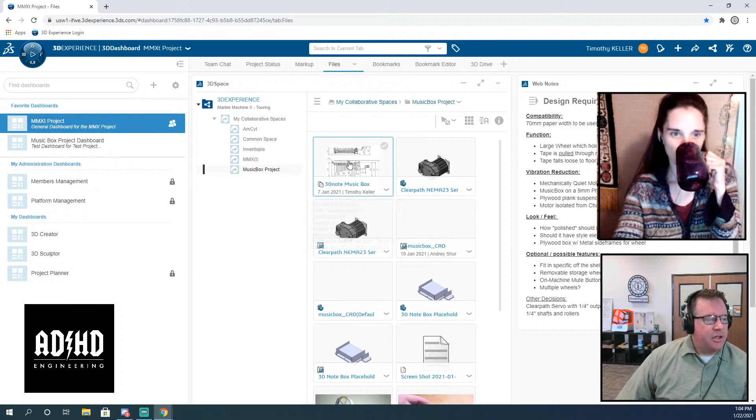So here in the platform, we have this 3D space, right? And I've uploaded a bunch of the drawings from the music box, right? And then we have this CAD — I uploaded a bunch of stuff, right? So the 3D experience thing, right, they allow you to upload a bunch of media, but there's also a 3D drive, right?

In the 3D experience, I don't know if either of those are actually the right place to do it. I think there's a better place, I just can't remember what it's called. So here, I downloaded some of the parts we're going to use for this music box from McMaster-Carr, right, so we have the drive pulleys, timing belts, that kind of stuff. I put them here because I can't upload a SolidWorks part into the 3D experience thing, right, but these don't show up really anywhere.

If I go to the music box project, I see these guys that I uploaded, but we're gonna go on at least this here. This is the dashboard that I made, and I don't know if I'm doing this right, but what I definitely do know is that I don't totally understand the hierarchy here. So those are those — what I understand is each one of those is a separate dashboard, right?

Here's the question: how do I find the files we worked on? So Music Box CAD, is this the one? No, that's the one that Andrey made, there are CAD files in the files. Here we go, this is loading more. So I'm just trying to grab the Music Box stream idea, and this doesn't show, it's a CAD family. Oh, that's another question — is with SolidWorks, there's like, you get parts. It's still loading for me.

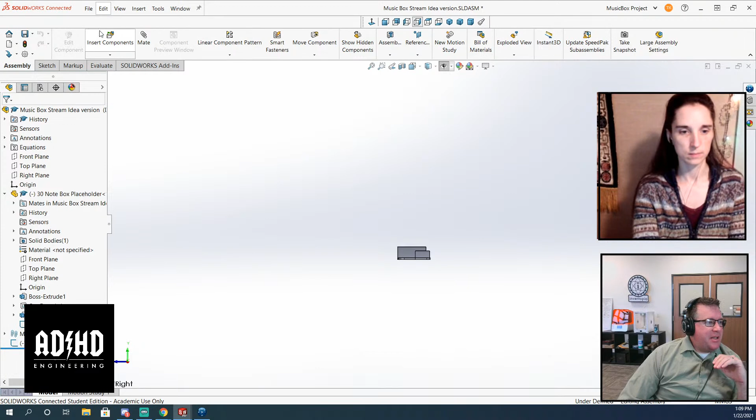Having a flat file structure is not going to work for that, so we do need to get a handle on this. But let's say I have this assembly. I have an assembly sketch here, which I can't see at the moment, but we have one part in here.

If I wanted to insert a component, I can insert the paper pulling mechanism because I have that open in its own window over here, and I've saved it, so it's in this little open documents box. So putting that in is no problem.

But I purposefully left bringing in the timing belt pulleys that go with this for today because I wanted to show this. So if I hit insert components and I hit browse, you saw that I had... I'm going to bring the dialog into this window.

I had uploaded these part files. They're SolidWorks parts that I downloaded from McMaster, and they are nowhere to be found.

And by the way, if you look at these things, so the things that I had done, I have a personal project, an Inventopia project, because I've been designing tables and stuff. That's kind of like my practice things. Those are all here.

So let's say if this is a project that we're all working on, all these things that I thought I kept separate in my Inventopia co-working tables project, which I wanted to keep separate from the Marble Machine project because this has nothing to do with it, are still showing up here in this file.

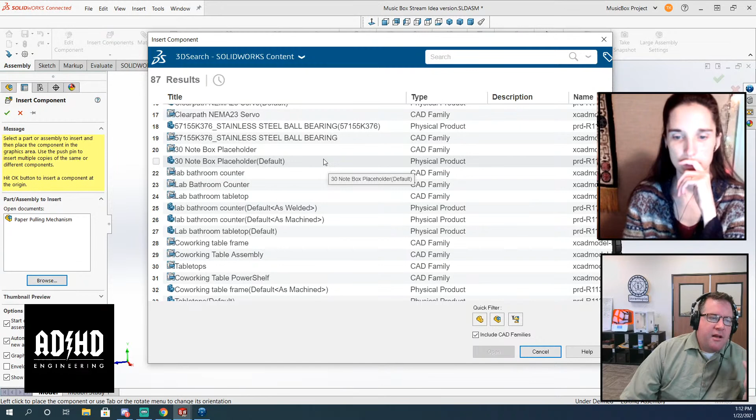If you look on the platform, this is one of the various things I'm building - these are tables I'm building for my incubator. That's fine, it's all in its own thing. But when I'm pulling it up and trying to figure out how we manage this, that's the next step and the biggest issue we need to drill into and understand, because this isn't going to work when we're dealing with 2,000 parts for the Marble Machine.

Do you want me to be taking notes on this, questions we need answered, or are you already doing that? Well, I don't think I can stream and take notes. No, I mean did you already start a document or something?

Well, no, we have the notepads in the platform that we've been dealing with. Oh that's right, okay, I'm going to open that up - I couldn't remember where it was. It was in the MMXT project, and then we have the web notes right here.

There's a comment on YouTube right now from Tom Quinn. It says, 'What's in the arrow where it says SolidWorks content? Maybe you can tell us to only look in certain projects there.' Let me look.

The arrow that says SolidWorks content here - above that. Sorry, there's a delay from where I'm seeing your mouse. Yeah, there's nothing there. But here, you could do advanced search. Either way, all of these things. Oh, that's interesting, how do I get out of that? Regular search - I'm going to close this.

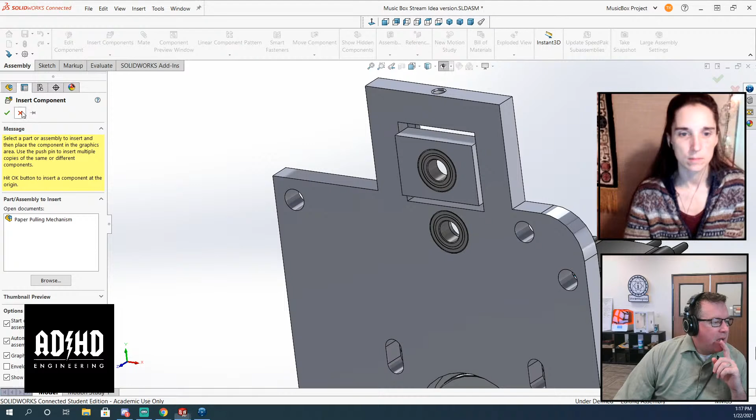540. Open this with SolidWorks connected. So now I have a bunch of SolidWorks here. Again, if you look at here, I'm going to close out of this. Insert components, the open file... that's not the one I want either. The ones that are open don't show up here. You have to open them and then save them. So let me open this guy.

If I save this, then it also shows up in the other place. It shows up in the 3D space. So when I do stuff here with the 3D drive and upload stuff here, until I open it with SolidWorks and save it, then it will show up in the 3D space. Anyway, it's just how it is.

So that's what happened. I downloaded these ball bearings from McMaster-Carr, and why I have 3 copies of them, I don't know. That's kind of annoying. Getting rid of the multiple copies would be an interesting thing to learn about. But anyway, let's move on to actually designing parts.

Well, hold on, because I'm still trying to get used to the 3D experience. I'm over in the Music Box dashboard. I'm not seeing the notes in there, and I just want to make sure I'm seeing the same dashboards that you're seeing, to make sure everything was shared with me.

Music Box dashboard project. If I can go to... I don't see any of those top files and media. Picture, notes and chat—I don't see any of that. Okay, oh boy, all right. Well, I'm just going to make notes locally and we can upload them later. Okay.

Yeah, there should be a way of sharing this thing, right? I should be able to... Oh yeah, I'm not seeing Music Box project dashboard. I think if you go up at the top, see the blue line, it says Music Box project dashboard with a little dropdown chevron. I know there's a lag, so it's up at the top. Yeah, you would think I would be able to share. It's the... there's the share there.

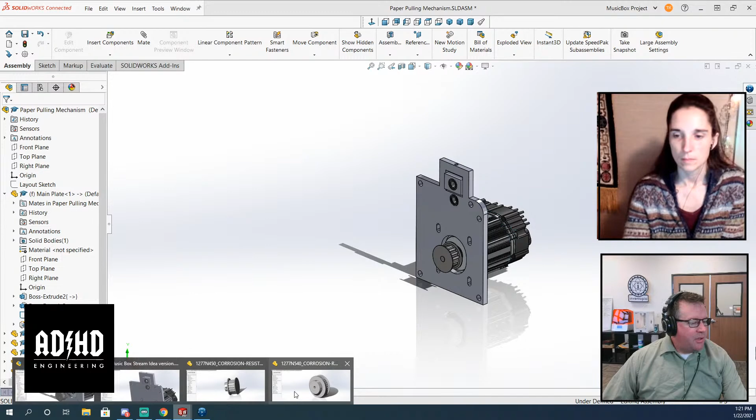Now I need to find the big guy. I'm going to save him, and save it in the platform. And of course, all of these files—if you look in the lower left-hand corner...

Because another user of this CAD workstation at Inventopia installed SolidWorks Student Edition, I am now infected—I am infecting everything in this project with the academic watermark. That was my original problem, if you remember, when I first installed this. Just wipe your hard drive now, man. Yeah, we might have to just live with it. And actually, if we're willing to just live with it, that might be liberating, because it would mean we could bring people onto the CAD team who do have a student license. It's not like... that watermark is there to shame people who are using a student license for commercial purposes, but we do legitimately have a license that we legitimately got from SolidWorks. So we're not scalping it, right? So morally, I feel okay if stuff is watermarked like that. None of us are paid for doing this, either. So anyway.

Wait, you're not being paid? I'm being paid. Oh, you are? Okay, can I be a subcontractor? I mean, you haven't sent my check yet, but I didn't know that's how this was working. There have been misunderstandings. We should have clarified that at the beginning. What part of slave labor did you not understand?

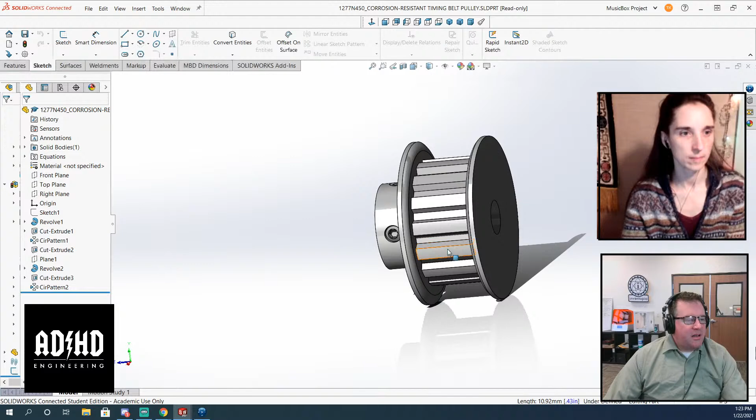Oh, this isn't constrained at all. Beautiful. Oh, because I just did that in this assembly. I thought I was doing that in the paper pulling mechanism, which I'm going to close now. Discard and close. I'm also going to close. Well, we'll see. Just so that I don't make that mistake again. Yeah, there we go.

All right, so let me change gears. You guys ready to change gears a little bit with me? Yep. Yeah, all right. So last week we did all this.

And what I think I want to do is... oh, there's a ton of blue lines. Well, yeah, I mean, we were sketching, right? I'm going to break this thing all apart.

I think what I want to do is, so this part up here, this is the soundboard that's actually doing the resonating, and it needs to be vibrationally isolated from the motor.

So what I think I want to do is let me get this assembly. I'm going to open this subassembly first. I'm going to get this lined up, and I'm going to show you how I want to. I'm going to actually reopen it. I'm going to show you how I want to do the vibration isolation.

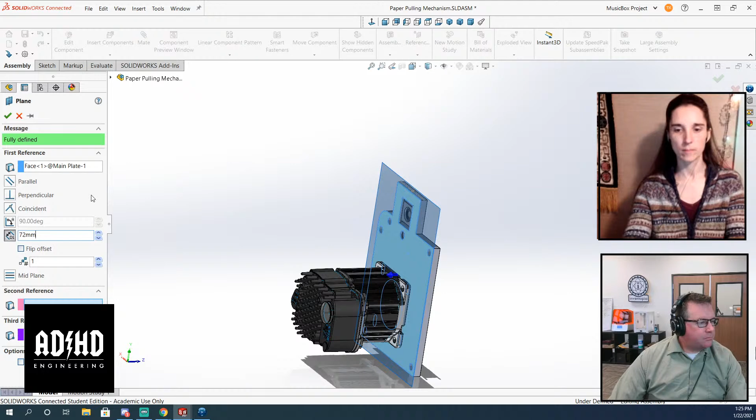But first, in this guy, I'm going to add a reference plane because the paper is 70 millimeters wide, and I want this to be 72 millimeters. I'm going to make a plane there, and then I'm going to add another plane in between those two. So that plane is the center line, or the mid plane.

How come I can't rename it? Am I just not patient enough? There you go. All right, save that guy. And then... oh, wait for it to send to the server. And close it. Yes, rebuild.

So now this guy, I have this mid plane, and I'm going to mate it with the... like that. And because this music box we lined up right on day one with the middle of the assembly, so now we're actually lined up that way. Okay, that's good. And we're also going to do, this is where the paper comes in, that plane right there, and we're going to have that be coincident with that. All right.

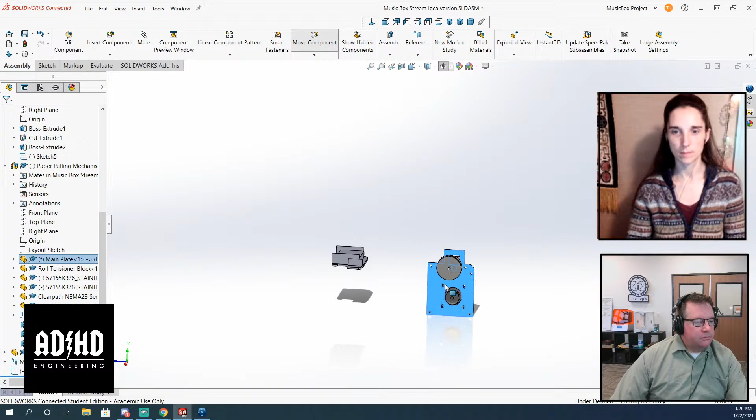So the papers, ooh, that's interesting. This is not fully constrained. Now it is. All right, so now we just have to play with that distance. So how do I get my...

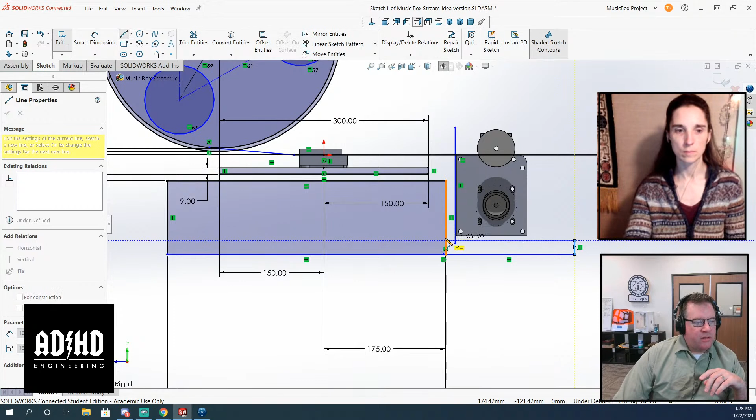David, you mentioned something about being able to view the drive in SolidWorks, so I wouldn't have to open files through the web browser. I'm sorry, browse the part library through SolidWorks and not the web app. Do you think that would be possible? I'm a little bit confused what you're asking. We have a set of files in the 3D space, I get it, for this project. Right, so not in 3D Drive, which we haven't solved yet. You're talking about within 3D space, the collaborative space. Yeah, so if you allowed SolidWorks to populate the collaborative space, like that's listed at the top right corner, all you have to do is use the open command, and it'll automatically go into your collaborative spaces to open parts. Great, yeah, and actually, if you're patient enough to wait for that collaborative space to load, your home screen also shows recent documents populated too. Awesome. Who would have thought that David is the patient one? That's like the series finale, shocker for me. Wait a minute, David's the patient one? It's all a lie, it's a facade. Fake news.

All right, so the idea I have for this paper pulling mechanism here is that because we want to do vibration isolation, and I have dealt with... let's go to McMaster.

McMaster vibration mounts, sandwich mounts. I've done these actually on some of my heavier drone frames. They ended up not being totally necessary.

But also there was a laser processing machine I designed a few years ago, where if you bumped the machine, the galvanometer that was steering the laser doing the decoration would go out of whack. So I did vibration isolation using basically these things.

So how effective are they? They were very effective. I don't know if they're going to be effective enough for this purpose, because we're only really going to know if you mount a motor and then test it.

But the idea here is that we use some of these mounts, located right here in between these two parts, top and back, and then one or two here, so that this module is floating with respect to this main body.

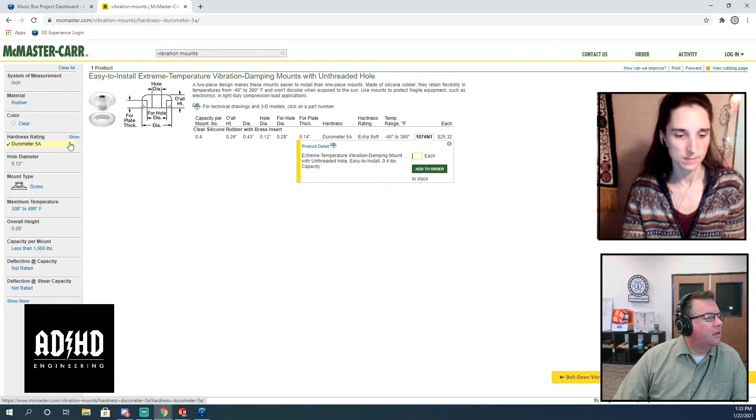Hey, does anybody remember if the durometer rating - lower is softer or lower is harder? I think lower is softer. Yeah, it is - I remember TPU 85A being softer than 95A. So here, thinking we want maximum vibration resistance, it would make sense that the softer the material, the more vibration isolation.

So here, down on the McMaster site. By the way, I don't know why no one else in e-commerce has figured out how to do a website as good as McMaster Carr has. It's been like this for 10 years, and nobody else has ever come close.

I found this years ago - I used to live down the street from McMaster Carr, which is crazy, and I found one of their places. I found their website and it blew my mind. I was like, everyone needs to organize everything this way. It's so easy to find anything on the whole website. This is my vision for the Discord, which is impossible, but I love it so much. I've loved it for years.

So let's have a discussion. Sorry, go ahead Eric. You guys remember? You guys know James Passmore?

He got a job working with McMaster Carr recently. Oh nice, that's cool. Good for him.

So here's the question. The parts that I've chosen - let's see how quickly we can piss off David Lewis. So this motor, this is a ClearPath servo motor.

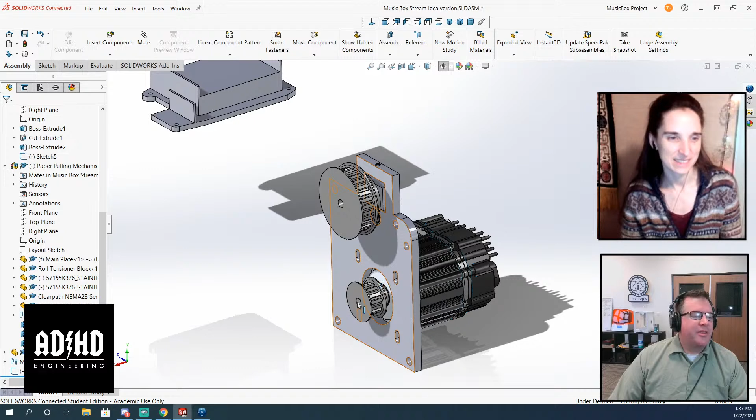So that means we now have timing pulleys that need to fit with those shafts, and those are going to be imperial. And then we're going to have a shaft in here - this is going to be a 1/4 inch shaft that goes through. So unless we want to make our own shaft, which we don't, the rollers that go on this are also going to be imperial.

So you have this stack up, and it's because the starting materials you have are imperial. David and I have complained together, not in such a public setting, but have complained quite a bit about how I really want to design metric. I want to live in a metric world, but it's really hard - you pay a price for trying to be committed to that.

Yeah, and Kooky is talking about working on a 90s car. By the way, the Ford F-150, the bed length is metric. If you look at it, it's like 5 point something - yeah, it's exactly a 2 meter long bed.

So there is hope. But one of the things that I don't like about this project already, but I'm willing to live with, is the fact that we're going to be building this thing using imperial parts. David, can you forgive me for that?

I can. I also could tell you though, and I've done this in the past myself, the bore of a sheave or a pulley is not set in stone. And actually you can buy sheaves or pulleys with a machinable bore.

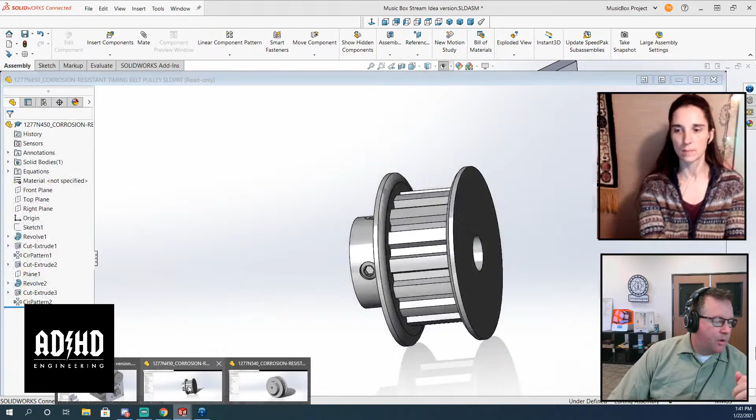The other thing is I'd love to use 8mm shafts, because then we can use skateboard bearings for all those bearings rather than these. The bearings I have in it are 1/4-inch ID bearings, and they're like $8 a piece. Anyway, I don't like paying a whole lot for bearings.

So that'll be my homework, trying to go metric with these drive pulleys. We'll start with an imperial motor, but then try to adapt from there. Yeah, love it, okay. You feel like your metric sensibilities are being catered to, David? I do, I feel refreshed and valued as a contributing member. Good, you are valuable.

All right, so I do have a comment. But I do have a caveat about those rubber standoffs. I have used those exact ones, I could even give you the part number from McMaster-Carr. If you're mounting something heavy vertically, the bushings are holding, so they're fine. But if you mount them on the side and put a load like a belt pulling against them, I don't know if those are the right ones. Yeah, that's a good point. Because they're two pieces of metal with rubber in between, so they're meant to vibrate this way, but not to be loaded in shear.

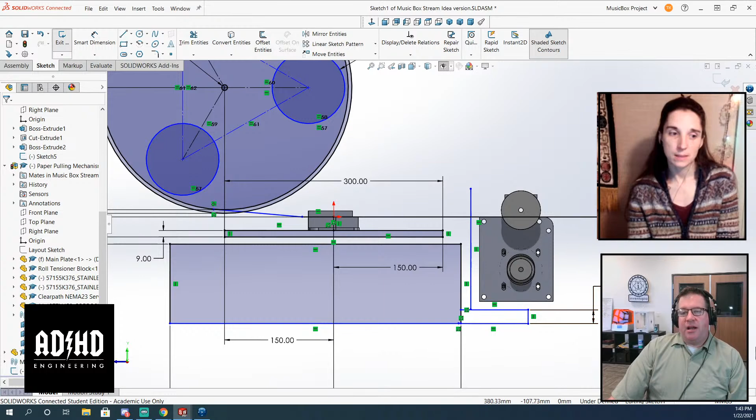Well, so that's the question, right? If we hand this over to Martin, are we going to make it in the U.S. and give it to him as a gift, or are we going to surprise him with a set of blueprints and tell him, 'Hey Martin, build this'? Yeah, he's not going to do that, he's got a million other things going on. I think if we're actually going to make this for real, we're going to have to do it ourselves, and for phase 2, farm it out to whoever we can find, kind of like how Martin does. I'm not envisioning Martin building multiple copies of the touring version himself. Maybe if these aren't going to be shipped across the ocean, there'll be two, one on the European continent, one in North America, so someone else will have to be building it.

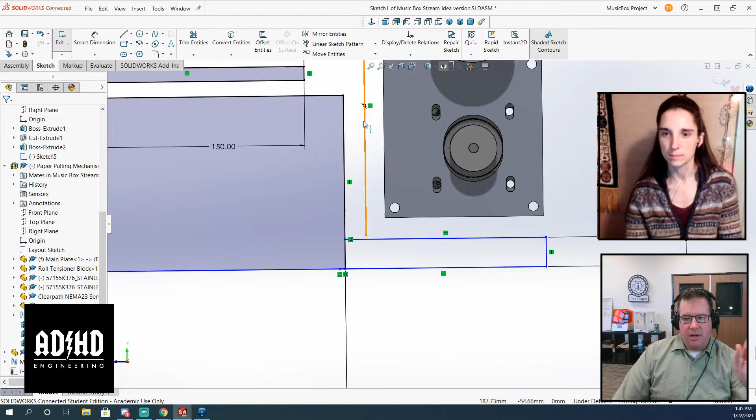Well, we're not going to solve that issue today. But getting back to the idea of shear, we have basically 4 of those mounts, so by gravity they're in compression onto a tongue sticking out the bottom edge. And then we have a couple here just to stabilize it in the pitch axis, from our perspective.

So let me just draw it. I kind of feel like this thing isn't fixed, and I want to project a geometry off of that, but I can't because it's not fixed. So do I just pick a location for that and call it good? I think I probably should.

Well, how should I constrain this? That's a very good question. I'm kind of thinking I just pick these 2 planes, and say that's a distance of 25.4 millimeters, and call it good. Well, this is where I would have built a skeleton first, and aren't we supposed to constrain it to that? Well, yes, but building the skeleton is something you can do once you've already figured out the design and made some design decisions.

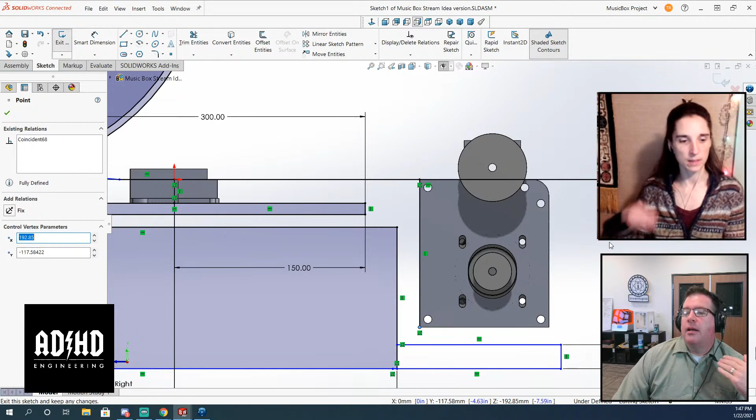So I have this sketch here, I intend for this sketch we were just working on to be the skeleton. But what we're doing right now is really back of the napkin, just doodling. And you know what we said in the stream last week was I'm willing to walk away from everything we do here. This is meant to be an experiment for the sake of learning the platform for phase 2, a learning exercise.

So now I'm gonna grab how thick these things are, the metric heights. Look at this, metric chemical resistant vibration damping mount, blah blah blah. The height is given in inches. But the threads are M6, and it's still 1 inch tall. Well, there is such a thing as a metric inch. I'm gonna metric barf on you for saying that.

Yeah, you can actually type that and it works fine. There's no reason not to include inch specifications if you have to, because even if you're in MMGS, you can still input inch. Or furlongs or chains or whatever. Yeah, I definitely want to work in furlongs.

That's like, have you heard about the FFF system? No. It's the furlong, Firkin, Fortnight system. So length unit is furlong, volume unit is Firkin, something apparently, and a fortnight is the time unit, obviously. I love it, that sounds amazing.

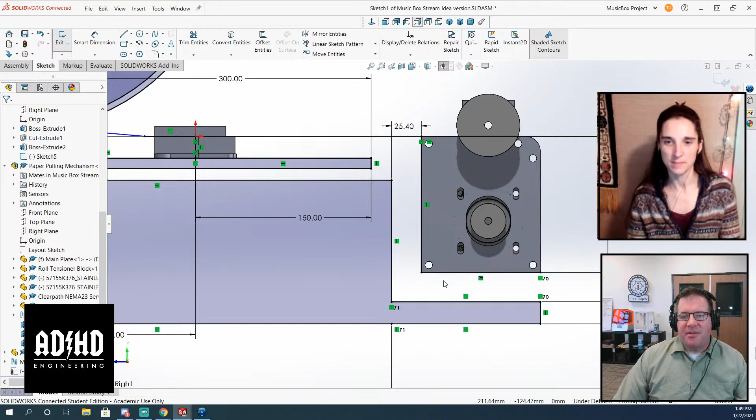Alright, so you can see the mounting concept here, which is that we have these big vibration pads. There'll be basically a shelf in this box, with vibration mounts. This will make it into basically a self-contained box, a powered module. We'll have the power come out of these connectors into here, and that'll be a flexible connection.

And there are 4 mounting points here, and 1 or 2 here just to keep it from rolling off. And then we'd have the same gap here. This is going to be 1 inch too, so we'll use the same part, I don't want to make a new global variable. So all of our vibration isolation will be done with the same part number. Yeah, good, awesome.

And we're looking at the back of the music box right now, right? We're looking at the side. So which side faces the audience? Probably like this side. Yeah, well, because in the other one...

Sorry, let in the other one. Go ahead. He has the spinny wheel thing in the backside, away from the audience. Is that so?

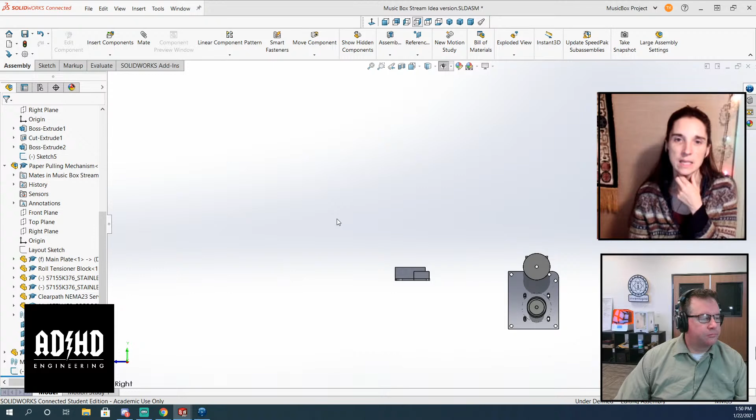I think so, I'll bring it up to look. I think it was on the left side, but meh. This is weird, how come you want to hide the motors behind so they don't show to the audience? I think the motors are ugly. That's what I'm trying to say. That's not very nice to the motors.

Well, here's a weird thing, design history wise - my logo is in the way here. Tim, your timeline is cringe. Here's the question, and this is the cringe thing: this is my layout sketch, and it's downstream of the part I just made. So I want to make a part based on this sketch, and when I open this, I'm already editing that part.

So this is why I generally don't design in assemblies. It's kind of, you're tripping over yourself, really. I made this argument in Fusion and was kind of outvoted. I get it, whatever, but the truth is that's kind of how you have to roll if you want to design in assemblies. It's just not made for it.

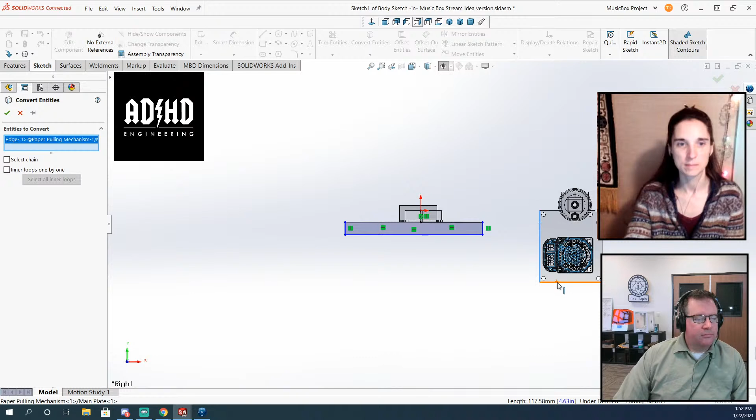Yeah, no, that's not how history works. But I did something wrong because I used to be able to make a layout sketch in an assembly. You can, absolutely - you have to activate the assembly. You're in a part right now. Right, okay, so what did I do?

So if I have this sketch, here's the assembly. Because how is this sketch not in the assembly? It is in the assembly. Yeah, but it comes after all your mates.

It's hard to describe exactly why it's like that, but there used to be - this was back when I was playing with SolidWorks 2011 - there was a layout thing in the assembly. That used to be a feature. I don't know if that went away, but yeah, that's what I was trying to do here.

This is apropos for our intended path with the MMX, which is that we want to make a family of skeleton sketches - our master sketches. So, David, if we were to start this over again, how do you do it so you have a skeleton sketch? Well, before you insert a part or create a new part, you would just start a sketch. It would stay at the top because there's no dependencies. Right now sketch 1 looks like it depends on other things because that's the master sketch.

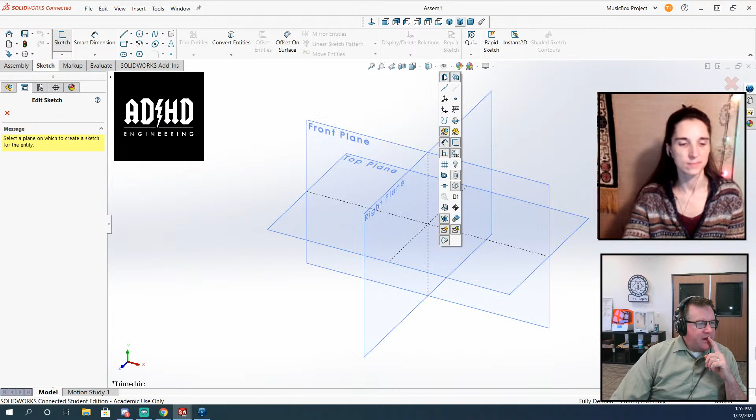If we were to make a sketch now - I don't know why my planes don't show up by default. Let's say we're doing this, and Tim, if you were to go in your feature tree and want to turn your planes on and off, right next to the A in ADHD in that black box, you'll see there's a little caret pointing right. There you go, now that allows you to turn those things on and off.

Pro tip - you can turn on and off sketches that way too. Like anything you're working on, you can turn on or off visualization from there, and also make things transparent, which is kind of cool. I like to work with surfaces transparent because then you can see through them.

Okay, so let's say this is our music box layout, where we have our soundboard, and now we have our box - this is kind of the way we drew it. And here is our paper pulling mechanism. So that box at the top has an open side somehow - it's not showing gray, not sure why. You must not have - it's because this one needs to be, or I did something weird.

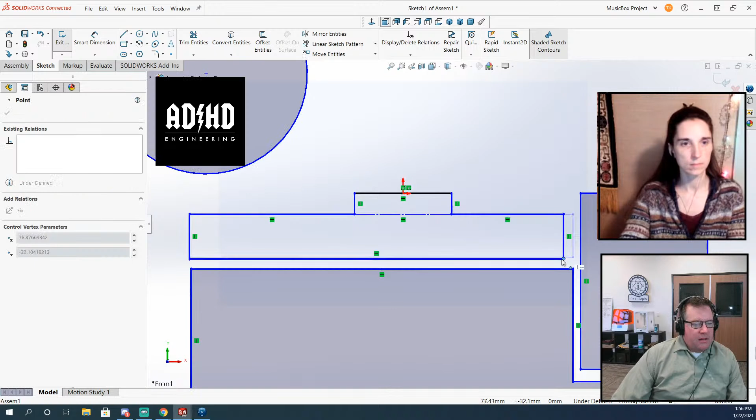Yeah, I'm not too worried about that because we're kind of doing this for, right? So I exit this sketch. Now this sketch is here, right?

Assembly, insert components. Let's put one of these timing belts into it. Okay, it's right there, let's see where that shows up. Oh no, my sketch is above that now. Okay, yeah, so that becomes your skeleton. That's the whole reason why you would have a skeleton - you put it in there first, so it is above it.

But here's my question, right? So in this one, this guy, I made this sketch after we placed this box. You guys watch, we developed this sketch last week, right? These three, you must have had dependencies. I was asleep. Okay, I forgive you for that, Eric.

By the way, the forgiveness is flowing on this side of the Atlantic. But anyway, so yeah, I mean, this thing was...

I don't think I understand that, but we inserted this thing and then we made this sketch. So I don't know, do me a favor, right click that sketch, and then choose parent child. Well, so that's another issue, look at this, this is on the bug list. How do you...?

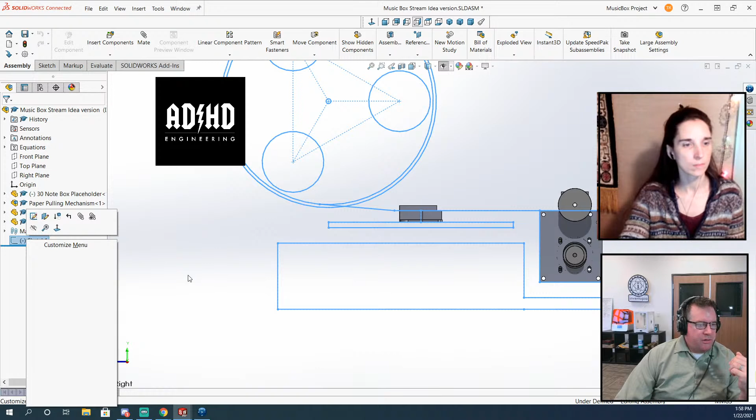I just did that exact same thing with the exact same thing in front of me, and I have it. Let me - is your sketch open still? No. So I have a feeling that happens because if I move SolidWorks to my other display, so I have a 1080p display on the left, which I'm streaming from, and then I have a much higher resolution primary display on the right, and I can see the things in that thing when I have it in my primary display. But if I have it over here, I have an older 1080p monitor here because it's the same resolution as I'm streaming from. So I think that's it, it's a monitor resolution issue. And I think SolidWorks thinks that - maybe I should change the designation, right? Maybe I should have the computer think that this is monitor 1, and the other one is monitor 2, and maybe then SolidWorks would get better. But yeah, I can't do that.

So okay, so you said let me do that offline then. So can you do it? Child? You can do it another way. Okay, if you go to the menu view and then user interface, you can actually enable - you might have seen on some presentations the parent-child visualization lines.

There you go, below it, there you go. One of those two, you can actually - it'll put arrows right in there. Yeah, I'm not getting anything. Well, because you haven't selected anything. You have to, if you grab that little tab and then move it - there you go, so that's what its dependencies are. So that sketch is dependent upon those two things above it. I see, so that's why it would really never let me do anything above that. It wouldn't let me. Got it.

Okay, so pro tip - wow, parametric design. Yeah, well, it's also, I mean, there's - okay, that's a cool feature. So we're not so far away that we can't just try to do it better the next time, right?

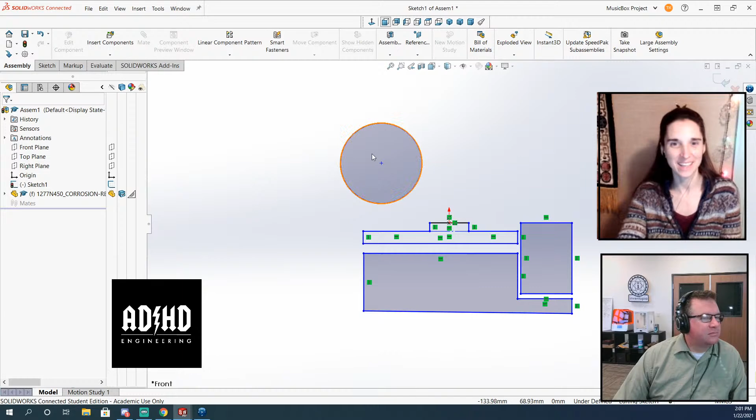Acoustic vibration isolation for the music industry. Did you take a look at the orientation of the music box on stage? Yeah, so the way that we're looking at it is from behind, the opposite way. The big wheel is on the left when you're... Okay, no, the big wheel's on the right if you're in the audience, because the way that the trapdoor falls open, I mean, the door storing all the components is that way.

That doesn't mean it has to be that way. It would be nice, I think, to have it look nice from either side, so that you can pick which side of the stage you want to put it on, because there's a bit of arrangement when you're doing a stage show of what looks nice. So that would be the most flexible solution. Just making sure that there's not some big ugly motor hanging out there would probably be my suggestion.

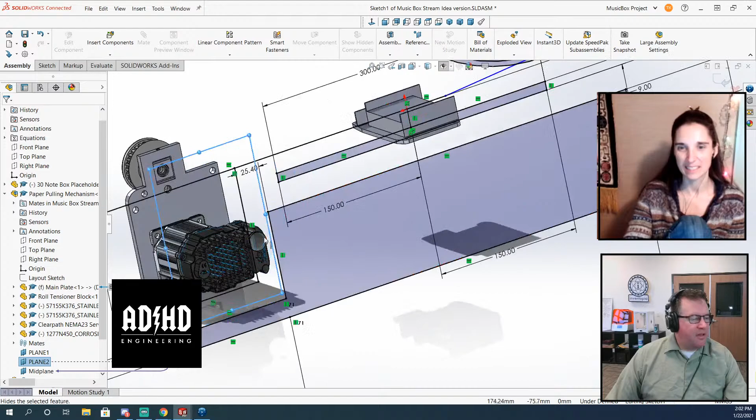Who are you calling a big ugly motor? I'm calling the thing that, yeah, we put on the music box. The idea here is, and I can't show you because I wasn't, it was that this is going to be entirely internal, that this motor will be in this mechanism down here. Just making sure. Yeah, and if you look at this thing, these, the secondary plane that I made, right? You really just have this. Maybe this does have to stick out - these are cooling fins.

Okay, so maybe it will be slightly visible, but there'll definitely be a plate over here because this is all going to be a box. This will get extruded from both sides. What if it was open on the bottom? Would that be enough cooling, or would it have to be aligned with the fins?

Well, I don't know how much, because we're not going to be really driving this motor hard. It's pulling paper, right? When I was looking at this, I thought 1/4 inch seems like a really thin shaft. How many Newton meters are those rated for? More than we need, awesome. I had to remind myself I should use 3/8 instead of 1/4 inch shaft because the motor is available in both 3/8 and 1/4 inch.

If you look at the 30-note music box, the built-in drive mechanism is just a 1.5 millimeter shaft with rubber rollers, so we just have to be stronger than that. We don't have to worry too much about being strong enough.

So is this motor overkill then? I mean, it's nice and it's really reliable, but can we simplify? It's never going to need to go fast, ever. Well, we are picking this because of the silence, really. Yeah, and that's really important too.

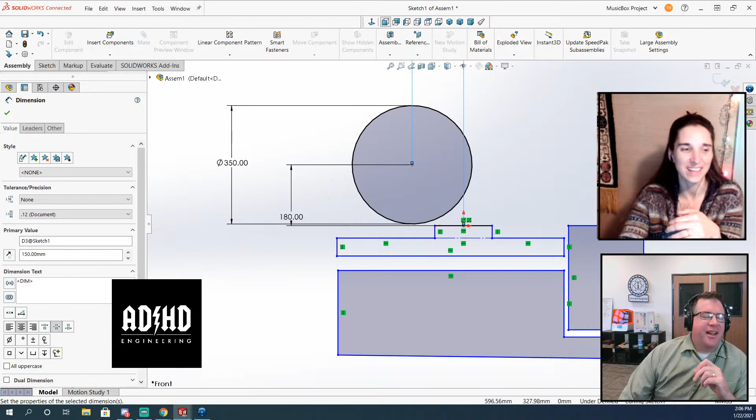Hey Andre, how you doing, man? Not too bad. And Eric, why does Andre showing up mean you have to say goodbye to me? Basically my internet cut out for a second, and I thought that you cut out for the third time instead. I mean, if you prefer Andre to me, you can say that - I'm not going to take it too personally. He's the skeleton man. Skeletor. Yeah, all right.

I'm redoing our entire thing, by the way. Yeah, how are you doing on it? Wait, redoing it is good. I think that redoing leads to something. I don't know, does it lead to good things? Probably, hopefully.

So I don't know if you noticed, Tim, but I was shaking my head when you were talking about brushless motors as if I had any clue what you were talking about. I don't know any of this stuff. Don't explain it to me, it's fine, but I've heard fancy things about brushless motors before - magnets, something about magnets. I mean, brush motors have magnets too. Do brush motor magnets brush against each other?

There's a brush that is a graphite or carbon thing, and it's mechanically transmitting the power into the rotor, and they're really noisy because there's actually a physical connection, and as it drives things forward, it connects to a different part of the winding.

They're really noisy, but also have great torque. You're talking about electrical noise, because you can definitely get DC motors that are pretty quiet.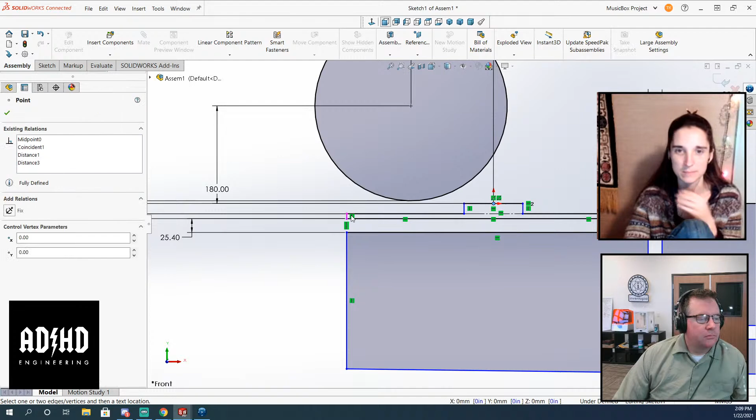How much space do you have for it, David? I've only used a self-built one, so I don't know anything about brands. I actually have a table from a laboratory from somewhere. It's like 4 feet by 12 feet long or something crazy.

But don't you live in an apartment in Hollywood? Dude, you don't even know how good I have it. Right behind my building is a 4-bay garage, none of which are occupied by cars. And my housemate works for Google, actually he's a coder.

He's actually my neighbor, my landlord is his wife. Anyway, he has his office in one of the bays. The one after that is literally just a workbench and almost nothing else, and the next two are just junk. So he's like, dude, totally, you could set that up right there.

I could have a full wood shop if I wanted to. I could put a Tormach in there if I wanted to. I'm not made of money, but I did just get my unemployment from last summer this morning, so it's burning a hole in my pocket.

I was going to say, because I actually want to upgrade mine - let's do this offline, but I might be willing to sell you mine if you have room for it, because I have people in my incubator who want an 8-foot. I have a 4 foot by 4 foot, the same one Martin has. But they've changed the way they do the rails since I bought that, so I can't get an extension kit to make it an 8-foot now - I'd have to completely replace all the linear bearings. Anyway, let's chat about that offline. Yeah, I would like to.

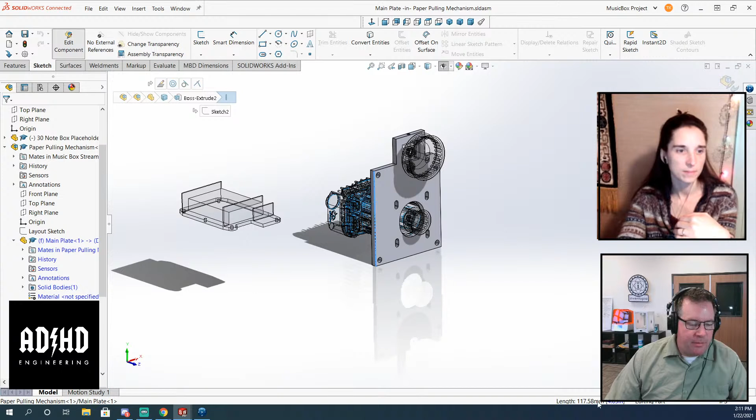So I need this dimension here, and it looks like I completely made up this dimension, 4.63. There's something about me when I see a number that isn't even in either metric or inches - it kind of makes me upset, and I don't know why I did that. If it doesn't round off at the micron, it's probably just bullshit. I'm gonna put that on my tombstone.

Well, obviously these constraints came from someplace - this is the layout sketch of that part. Is it tangent to something? No, so this is a pro tip: see this 2.50? That's driven from the center of this spindle, which is tangent to this guy - the origin is right where the paper comes through. So we have 3/4 inch, and this dimension here is 2.5328.

And the reason that's a weird number is because I used a belt center-to-center distance calculator, the SDP SI belt length calculator.

If you don't know about this, I want a 2-to-1 ratio. So to figure out if I can buy a belt that will fit this size, I have metal timing pulleys. One of them is 15, this one's 30. You say the desired distance is 2.5 inches, and it will give you the actual distance based on the part, and show you the parts that they carry.

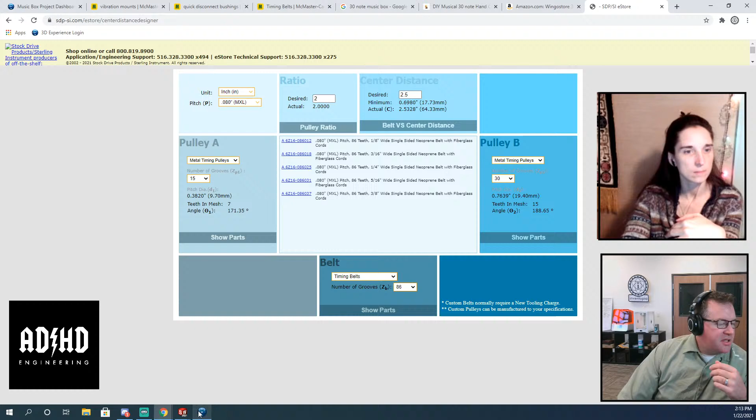So this is a way I got that 2.5328 based on how I filled this out, and I was paying attention to how I filled out these. I'm going to let this dimension off the hook for being a weird number because it's driven by a combination of a rational dimension away from the center of the stepper motor or servo, and this number is derived by something else.

Couldn't you use the path length dimension feature in SolidWorks to do this? Yeah, but there's a calculator - it's basically just doing that on its own, it just kind of knows how to do it. You're using an external tool.

Additionally, which I agree is probably not ideal if you have an alternative, I don't know that I would select the center to center distance as an input. I think that should be your output - you should get a center distance. You should say center distance is the output, and I want a 200 millimeter belt using these diameter pulleys.

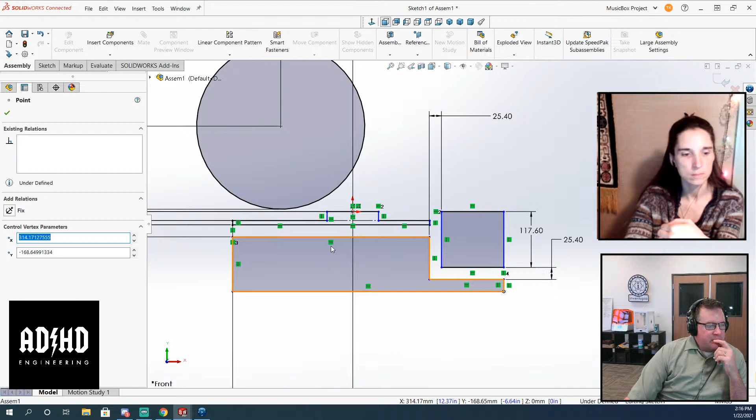Why are there gaps between these parts? Because you came late and we don't want to explain it to you again. I'll have fun discovering it on my own - sound isolation. Yeah, we're gonna do vibration isolation, sandwich mounts in here and here.

All right, so now let's play with - I don't know how wide this thing is supposed to be. Hold on a second, we're adding one more dimension out of here, which is this dimension - 4 inches.

I really hate that we're already doing mixed units. No, I love mixed units. Great, awesome, I love them.

All right, so now most of these guys are black. I actually don't care how - actually, though, what I have this... I have this open, so that is 70 millimeters. Not that this matters.

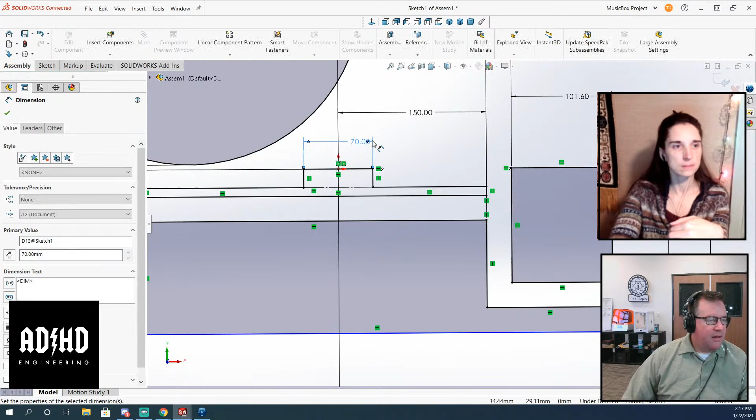All right, we're still not sure about how right those dimensions are. Correct. So should I use, what's like 3/4 inch? This is a stupid dimension because you can't actually get exactly 3/4 inch plywood anywhere, it's going to be something else.

Well, actually, the Baltic birch is metric anyway - I don't think Baltic birch plywood comes in imperial. Yeah, each layer is 1 millimeter thick. Oh, that's cool. All right, so then let's go back here - but what is 3/4? 19 millimeters. It's actually almost exactly - so you're gonna get 19 millimeter plywood, or 18 millimeter or whatever.

Good, well that means we can also - because Martin did test different thicknesses of plywood and liked how 9 millimeter... he mentions that in that video, right? Yeah, he likes that, so we can give him that.

Wouldn't we want the rest of the box to be made out of something thinner than 3/4 inch? Yeah, because that's real bulky. Oh, Jesus Christ, yeah.

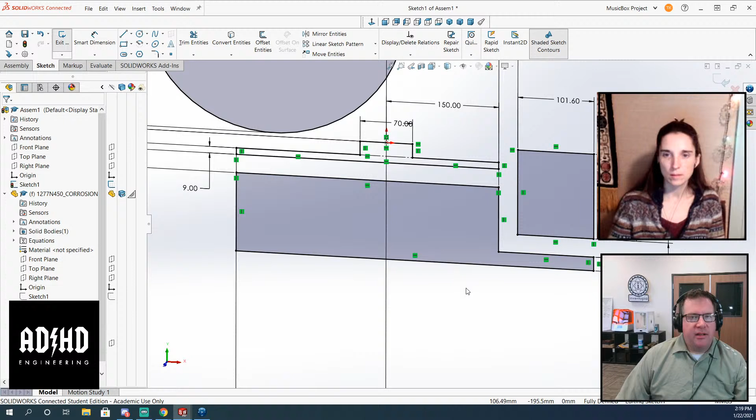Well, that's true, but the reason I did 3/4 inch is because I think that's the thickest we can get, and because it's going to be supporting all the weight of this drive mechanism, and it's going to be cantilevered. How heavy is that? How heavy is a ClearPath servo? It's probably less than 1 kilogram, but it might be close. 3/4 inches seems a bit bulky.

ClearPath NEMA 23 servo, especially if we're gonna try to fit it.

3/4 inch plywood is heavy, and sturdy, but I could settle for 9 millimeter. If we're going to continue with the idea of putting everything inside the box, it would be better to have thinner walls. Probably should still be plywood though to match the MMX's aesthetic. Yeah, the walls up in this part can definitely be thinner.

I was just saying this can be like the floor, the base of it. Yeah, okay, well let's actually start building that.

So now we have this layout sketch, even though looks like they did away with that thing. We're going to do a new part. Unable to, I need to save this assembly. Save. Music box.

Stream 2. Sending request to server.

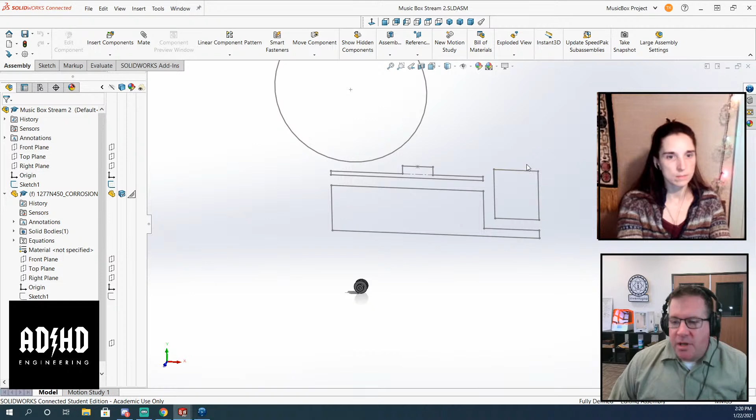Random question: who here has had a sea shanty stuck in their head this past week? It's all about the sea shanties nowadays, isn't it? I don't have TikTok, but I've heard about this.

No, I haven't watched it. I have never touched TikTok. It's like you don't have to have TikTok because it bled into everything else. So even if you don't have TikTok, no it didn't. You end up watching TikTok because it bled thanks to people like you, Tim. I actually, bleeder, you're a bleeder.

Actually, I haven't heard a sea shanty this entire year. Surprised. Don't make him start playing it in the stream, man. Tim, don't. I'm not gonna do that, but I'm just letting you know I currently have a sea shanty in my head, and I've been suppressing the desire to break into song this entire time, and I do that for you. We appreciate your dedication. I appreciate your restraint. Keep using that restraint. All right, so the only sea shanty I could possibly think of is like 'Blow the Man Down.'

Isn't that the little children's one? Probably, sure. I think that's a sea shanty, although I don't know what a sea shanty is. They're work songs, like whaling songs. Yeah, songs to sing while you're harvesting whales. Oh, I don't usually sing while I whale, but you know, to each his own.

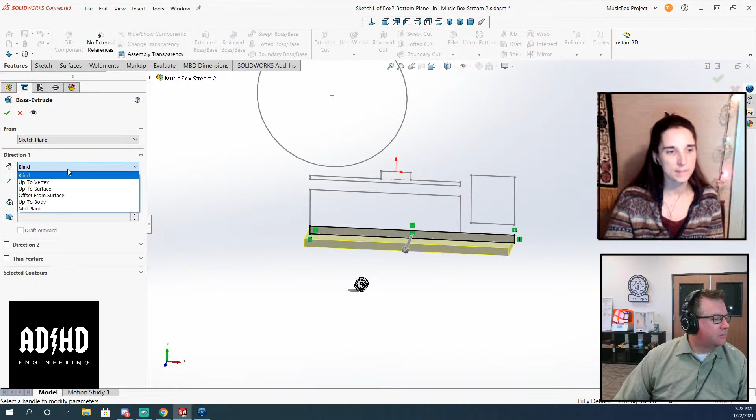So here in Sweden, during midsummer, we drink a lot. Good, and drink a lot of what? You have that in common with your American friends. Booze. But yeah, especially during midsummer, fermented lingonberry jam. You're very funny. I'm sure there's some very nice lingonberry cocktails out there. No, it's mostly just schnapps.

But yeah, we have some snapsvisor, which is just schnapps shanties. I'm gonna have to teach you some of those one day. Actually, our national anthem was originally a drinking bar song. Yeah, it was composed like in a tavern, wasn't it? Wait, which one? Well, the lyrics. Star Spangled Banner, the lyrics were composed on a battleship.

Oh right, yeah, but the tune of the Star Spangled Banner is a drinking song. Nice, yeah, awesome. So that sea shanty was from New Zealand around 1860, 1870, been around for a while. Oh, the one currently invading TikTok and everywhere else. The Wellerman one that you linked to, yeah.

Stop, yeah, we're already losing people. Oh, and the stream has gone down to 5 people.

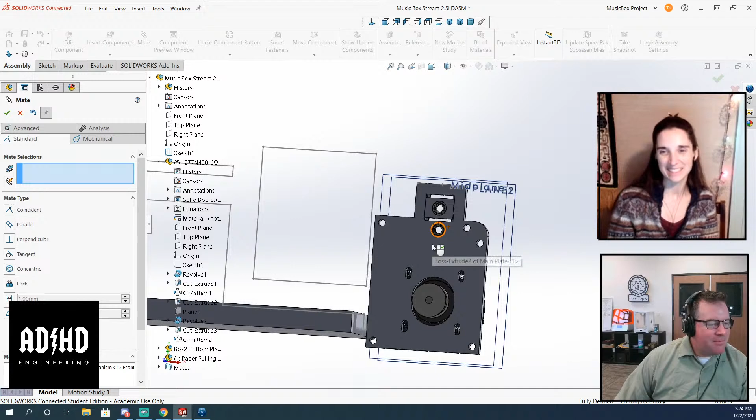I get it. But yeah, that's looking good. Hey Andre, I very much liked your adjustable screw design for the height module.

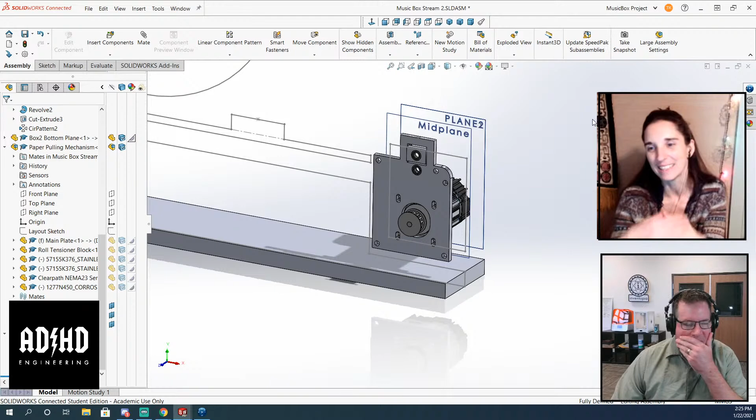Yeah, I think a lot of people drew basically the same thing. Maybe Martin will. Actually, what I hope is he won't do anything and it'll just work. Let him do his relentless testing, mad scientist thing. It's just so frustrating to watch all these great ideas coming through Discord and then watching Martin pound away. Did you see how sad he looked with that improvised song from the last daily video? He was like a beaten man. He's been putting too many videos out, I can't keep track. That's why I'm prototyping this thing right now, one of the Marblegate ideas, because he just looked so sad. Well, I think all of us who are involved with this project are mostly here because we want to help Martin, right? Yeah, and so there's something... I'm in it for the money.

Sweet, dude. You guys know the movie Dodgeball? There's that guy who's like, I read obscure sports quarterly, you know, for the chicks. Glad that's working out for you.

All right, so here we have a ship it, right? We're done. A plank with a motor on it. Great, nice, awesome. I mean this is like what it would look like if you told me you wanted it built in like 10 minutes, just screw some things onto a plank. No, this is an aluminum part that's already milled, so we're already past that.

Is that a standard bracket? This thing? No, this is totally custom. Can we get a standard bracket? Well, I tell you what, if you can find one, I'll Venmo you $5. I don't have Venmo. Okay, bummer. All right then, bets off.

Quick question: how are those slots, how are those little ledges going to happen? So there's a part - that's a good question, let's get into this. Yorin says thick plywood, aluminum bracket - this thing is going to be heavy. That's what I'm saying. We've got to reduce weight. How thick do you think this is? Like 4 millimeters?

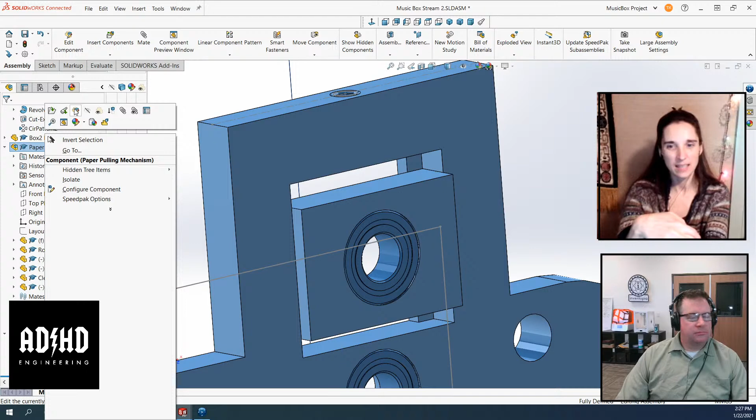Okay, here's the plan: you build this whole thing, then you cut holes in it. Make it aero, drillium. Just use that algorithm that creates cell shapes of random shape, Voronoi everything. You could do the same thing with the plywood too, with milling out pockets - make isogrid pockets. Simplify and add lightness - that's Lotus's design philosophy. Simplify and add lightness, yeah.

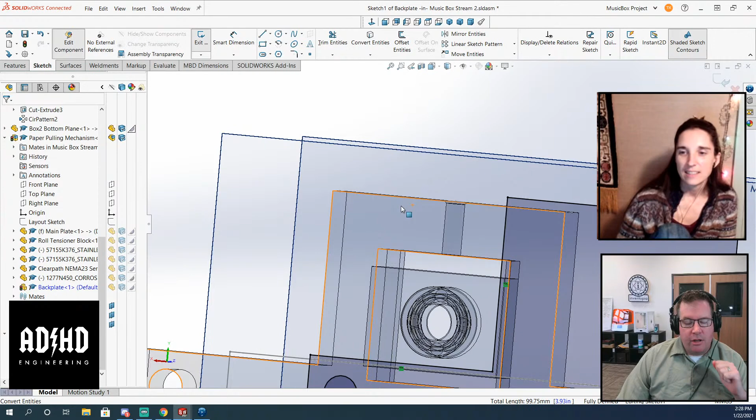Awesome, so let's talk about these ledges. Which ledges? Well, you've got a part up there sliding on these ledges. So the idea here is on this ledge there's going to be another part I haven't drawn yet that's going to hold this block in, and it's going to be basically stepped. So we'll be able to use a screw through here to force this thing down and create compression between the two sets of rubber rollers. You can let up on that to the extent that you can still get the paper in there, but you can clamp it down to the point where it's going to have really good grip on the paper. That's the design intent, at least.

Okay, so we've got 2 comments here. Max says to reduce weight we should cut out the Wintergatan logo into the sides of the plywood, which could be the vent hole partially. And Matthias says calculate the stresses and use the option to reduce material when there is no or little stress. And then Joran says the motor can be way smaller - if you want to reduce weight, make the box out of 2 millimeter bent steel frame, that should be strong enough, and put thin plywood on the sides for the aesthetics.

So now we're going to be... so that's another argument for the idea of not using this motor, right? Because this is the smallest that these ClearPath motors come in. Oh, they don't come in NEMA 17? No, the 23 are the smallest. So that's kind of, we're kind of 2 strikes away already for this. That's what I've been saying, man. Yeah, smaller motor - the smaller motor is fine. I've just made some assumptions for the sake of getting this thing kind of...

I mean, we should also consider keeping costs down as well if we can. This is going to be coming out of our own pockets, I'm assuming, if we actually make this thing. So I don't disagree. That said, when you have competing design requirements, right, one might be let's keep it cost effective versus reliability.

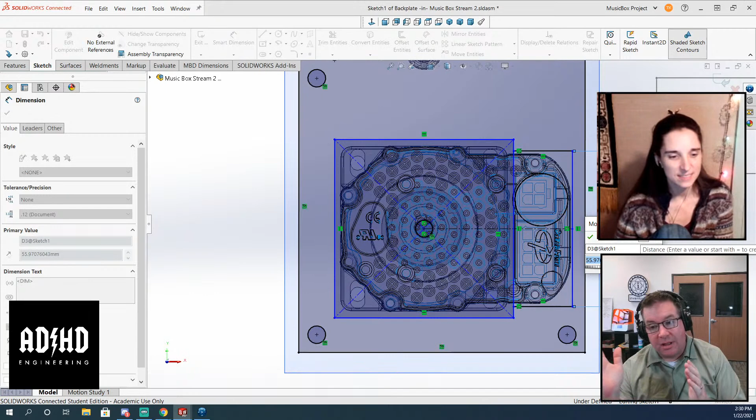You want to spend the money on the reliability, right? Yeah, don't go Chinesium. There's definite things we know are high priorities for Martin - reliability and sound, it has to sound good. That's probably number 1, since this is for a band. If it doesn't sound good, it doesn't matter about reliability. And it has to look cool - that's number 3. The practicality is way at the bottom.

We have a design requirements document that's in the platform. Oh, that's right, that was the first thing. All right, let me go over there.

I made sure to include that because as general practice, whenever I start with a client I'm developing stuff for, sometimes they're shocked. They're like, why don't you just start building it? Why do you want to have this long conversation with me about my design requirements? Just build it. And if you don't have that right, you build something wrong. I have to educate my clients on that sometimes.

So that plane, this is going to be a quarter inch. Tim, why don't you just already know what I want? That's basically the notion of many clients.

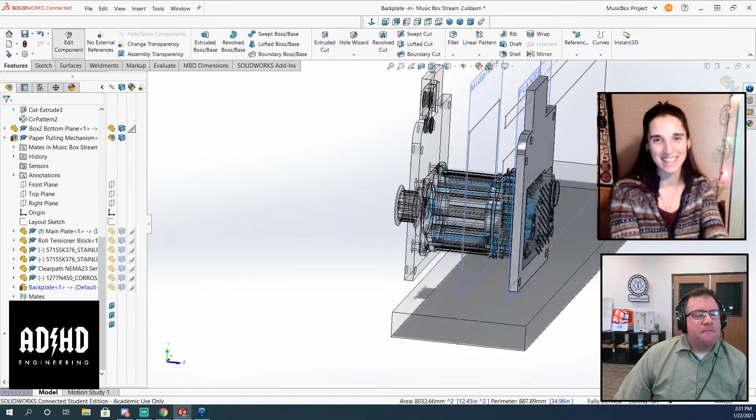It also happened with the Marble Machine. When we did the project charter, I wrote up that we're going to completely defeature this thing so we can have a full model, so it can load in Fusion 360 and we can check the interferences, but we're going to do that by taking away features. Then Martin was surprised that we had taken away features. Six months later he was like, 'Wait, what?' Surprised Pikachu face - I copied the project charter and showed him, and he's like, 'Oh yeah, okay, you're right.'

This looks super ugly, what I just made here. This is disgusting. But anyway, I'm gonna let it slide for now. It's okay, that motor's going anyways.

You're out to get that motor. Yeah, this motor has specific dimensions in mind, but just don't worry about it - that motor's gonna be going. So I'm open to that.

What I want is, for anybody on the team watching on YouTube, if you can send me specs for a brushless motor that can get this job done with an encoder and a speed controller. I don't know what that product stack looks like - I don't have experience with that, I've dealt with industrial servos. Wait, I'm typing this down: brushless motor with encoder, speed controller.

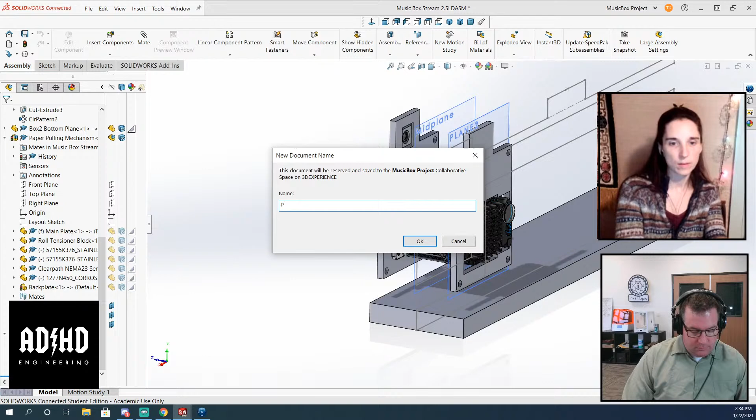It's not a super tough requirements list. Is that you volunteering for that then? No - someone's asking why you need an encoder. Is that for speed control?

Take that, Eric - an encoder just tells you how far it's gone, where it is currently, so we can keep the position. In the software that controls it, we're going to want to output because Martin is going to be thinking in terms of beats per minute. Like the thing Sebastian's building, I'm pretty sure he's done that - there's going to be a gear ratio, and how many output pulses of the controller translate into what BPM the machine is working at. So the microcontroller, the Arduino he's using, will do that math and tell the motor how fast to run. But the motor has to know how fast it's running - that's why it needs the encoder.

So the alternative is running it open loop, assuming the stepper isn't going to skip any steps. That is the way most 3D printers work. Well, Matthias says look into RC car motors, but those are noisy, and they don't have encoders. They just run. I'm on board with that idea in general.

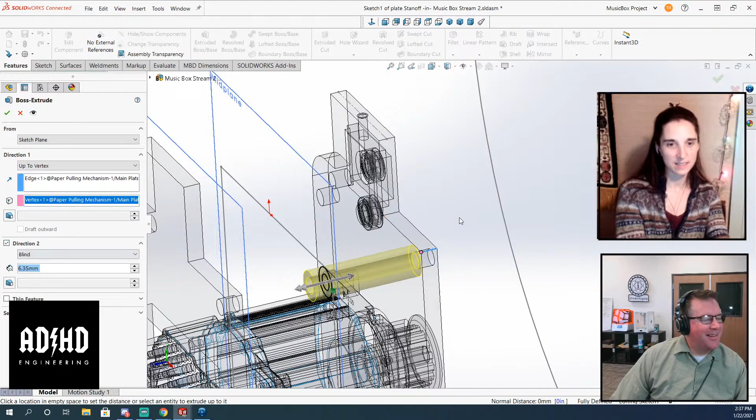You see, we actually pay more for paper than for ink now because we use pirate ink. Like ink from pirates? They're just singing sea shanties, surely, and then take their ink, which they're transporting massive amounts of - giant 2-liter bottles that we feed into the cartridges. So the printer thinks it's always full cartridges and never complains. Yorin's ink made from octopus by pirates. Wasn't one of the Pirates of the Caribbean bad guys an octopus too? More like a kraken - he had tentacles on his face, but wasn't necessarily. Do you think he could ink though, or is that a personal pirate question? That's up to him to answer.

All right, where did I make this part? Oh, I made a new part for the paper pulling mechanism, but I made it outside of that subassembly. These are the kind of things we will punish people for doing later.

Classic, making it in the wrong level of the assembly. If I had a quarter every time I did that. You keep putting your files not in the buckets. I put them right next to the other files that I copied. Usually.

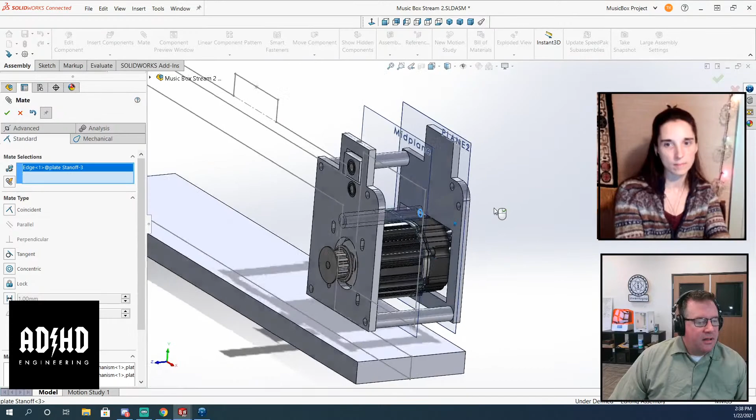Again, you guys are witnessing why I love assemblies in SolidWorks. So these two holes here, I'm going to put this here just for the sake of doing it. I love that I can just pull out new iterations of a part by dragging it onto the workspace. You can do that in Fusion too - you can just choose version. Well no, because you're just dragging copies of the same part, right? Yeah, you can do that.

I had this idea - the reason I made this radius here is because this is where the paper is exiting and it's going to fall off. I was thinking maybe we'd want a 3D printed guide for it, but I don't think the paper would ever go past this standoff and somehow fall in. The paper is stiff enough that it's going to go straight for a little while before curving down. It's not typing paper, it's thin cardstock, I think.

All right, let's see if it can figure out. There we go, music box. Where's my music box? 30 note box placeholder.

So here's a question - difference between physical product and CAD family. We have two different, it's the same part. We don't know. You can actually deselect that, by the way. Below that, in quick filter, you could just eliminate CAD family. I think it's just a hierarchical thing - it's probably just going to select the product anyway, but you can eliminate that from the list.

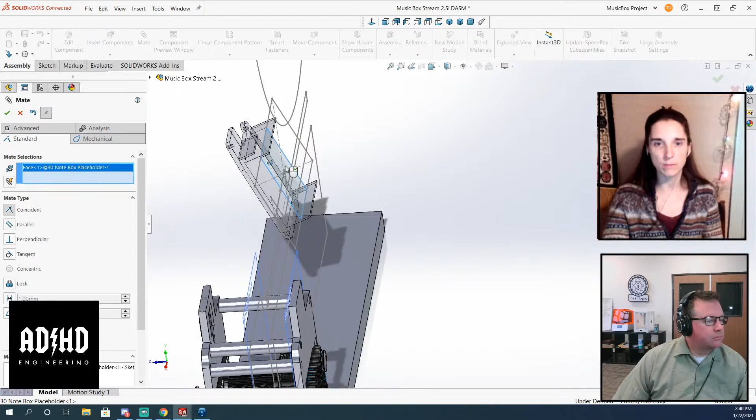What did we guess on last time we discussed this? CAD family is probably for usage in other apps other than SolidWorks. So if you want to - I think CAD family means it's the CAD, and physical product means that's the CAM, right? That would make sense, except it always generates the other type of file even if I didn't tell it how to CAM it. So I don't know. Maybe it's just assuming you're going to make it and being helpful. I've got it on the question list now.

Hey, so we can already see my paper pulling mechanism is over here. It's not as wide - this box here, I made it however wide I made it. The music box is already wider than this mechanism for scale. So if you look at, let's find the images, files and media, this 3D space.

How wide, we need to find a measurement for how wide the actual original box was. I don't think we got that dimension. Put in a measurement request. No, that's a task for the team members to try and figure out.

Right, so this has some... actually, this is an interesting question. What the hell are these things here for? Wow, look at those rubber bands. Oh, that's cool, that's the vibration isolation. Yeah, that's a clamp, to clamp the music box in there.

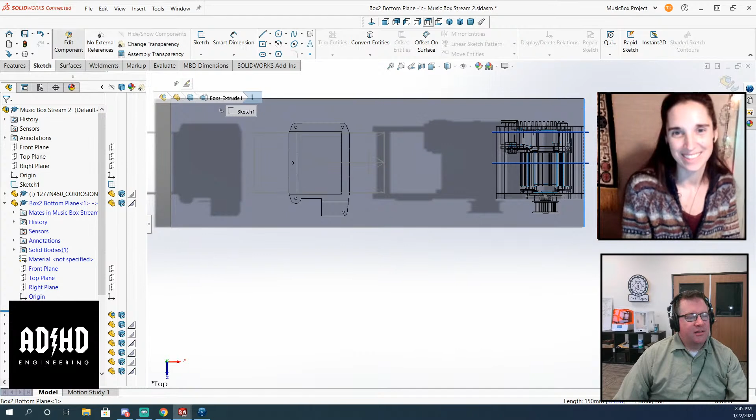Using a micrometer? No, sorry. Ooh yeah, I know places where they put you out to sea on a little skiff by yourself for saying stuff like that. Andre would have been sent to sea years ago, preemptively, for all the wisecracks.

So that's 150. I don't think that there's room right here for a clamp on this side. So I'm gonna go, if that's 150 millimeters, I'm gonna go to 200.

Sounds good. Okay, here's my question: is a hair dryer a brush motor? Probably, like the handheld ones that are super loud. Well, those are loud because there's a fan in there. That looks too big, it's a motor too though. Yeah, the cheapest ones are probably brush motors, that would be my guess. Yeah, because I feel like I've looked in the vents of one of those and seen sparks. Yeah, that makes sense.

All right, then I know what it is. Of course, now I gotta Wikipedia it. 175.

And by the way, if that's the width of this thing, Maureen, you no longer have to hate on this motor for being ugly, because it's totally going to be internal to the box. That's what I was hoping. Cool.

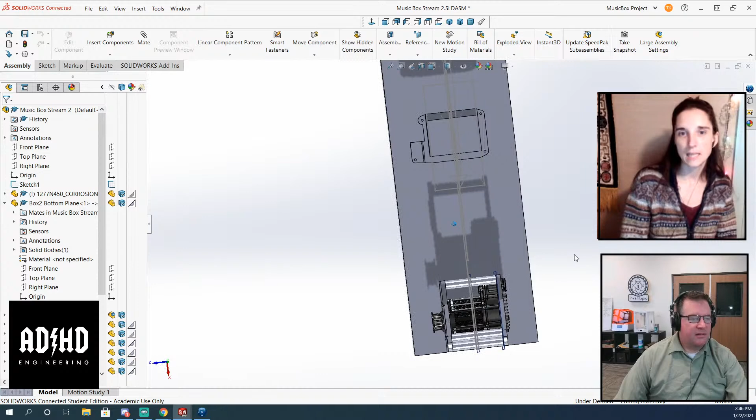Okay, are those little hedgehog spikes going to stick out? I did design this mechanism thinking this was also flush with the left side of the box. And if the box is that wide, this can't be, because this gap is constrained - this is 72 millimeters in between here and here. So the motor has plenty of space for the fan to blow air inside the box.

If the pulleys are sticking out the side of that expanded box, yeah. Although we don't want a fan because that's more mechanical noise. I'm sorry, the fins - what am I saying, fins. Sorry, I'm looking up hair dryers.

Obviously, and what that means then is that this whole lower part of this plate is not necessary. I could put another standoff up here and just have this thing - well, we'll see. That design could change quite a bit.

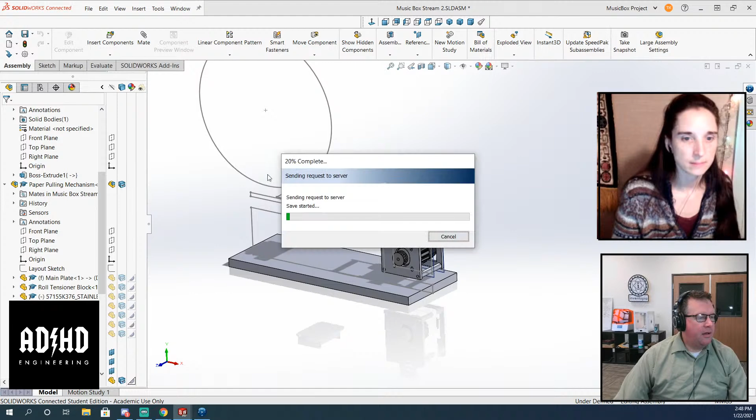We're going to do a new part, and it's going to be called the soundboard. And that's going to be... I almost started singing a shanty right there.

Oh my gosh, the 60s had some weird old hair dryer options. All right, I'm done.

My mom told me when she was a kid, shampoo came in glass bottles. Ew, really? Wow dude, you're gonna drop that thing in the shower and have broken glass everywhere. Well, I think they didn't shower really. Yeah, it does make it easier, like when you're bathing in the creek bed.

What about like powdered shampoo, like dishwashing powder? You can get that kind too. So when I was a kid, I had powdered bubble bath. When Tim was a kid, there was - I still remember the pink bubble guy on the front of the box. Mr. Bubble, yeah, there you go.

Yeah, see, I'm not crazy. Yeah, he was, and it was actually some of the best bubble bath. It would make huge amounts of bubble, and it was like this powdered soap.

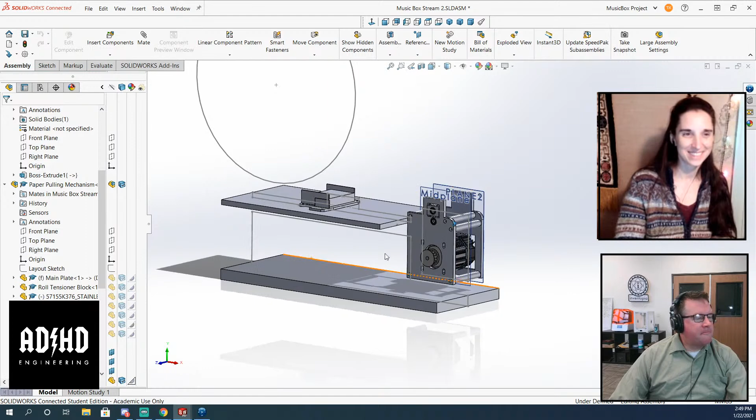I don't want to know how much caffeine I have consumed today. But I was just reflecting on it. All right, so speaking of that, I should drink my second coffee.

Should I just go ahead and make this thinner?

So I've had one quadruple espresso. Make it happen, you're a maniac dude. Another triple espresso, 2 vanilla lattes. Jesus, isn't it the middle of the night over there? Nah, it's only like 10 to midnight. And then I'm currently just finishing a cup of black coffee.

So do you do an all-nighter every weekend? No. Only when I have assignments, which is like every weekend. So almost every weekend. Yep. Where are you, in Malmö?

No, hey, huvudstaden - Stockholm. All right, so why'd you guess Malmö? It's the only other city I know. Nice, okay.

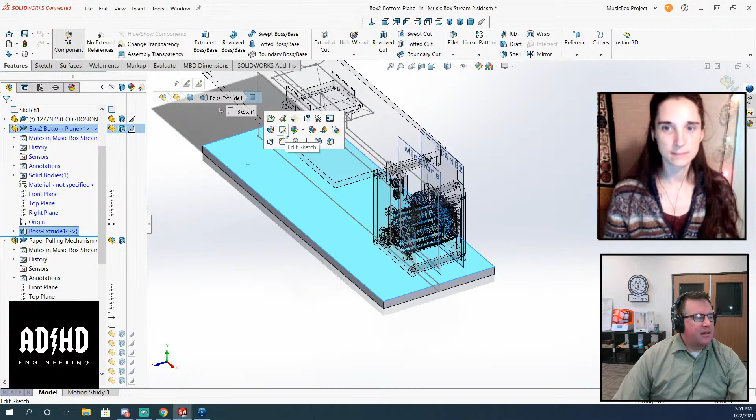What was that? Should we finger joint - I don't know what that means. Should we make these finger jointed, like the joinery, because I want to draw the left side of the box. And so the question is, do we... Here's the question: do I go whole hog and just dovetail it? What do we want to do? Dovetail it? Yeah, no - it's gonna match the MMX. So no finger joints.

You gotta put a biscuit joint. I'm thinking there are no finger joints on the MMX.

Okay, so I had an idea - this is going to need legs, right? What if we made base frame type legs for this to go on, of the same caliber? And then it just sits inside there - maybe we won't even see the lower joint. Well, I was thinking you'd have like a pedestal that it goes on. Right? If we look at this guy...

No, don't you think the legs... oh, that's not going to be transportable. What is it on there - is that on a single pole? I think it's on like a single pole. Yeah, it's on a mic stand. It might be - nice, it might be, I bet it is.

The question is, what are we gonna do in the remaining 8 minutes of the stream? Because what are you - it's already been about 2 hours.

That went really fast, by the way. Did it? Yeah, yeah, it did. It did.

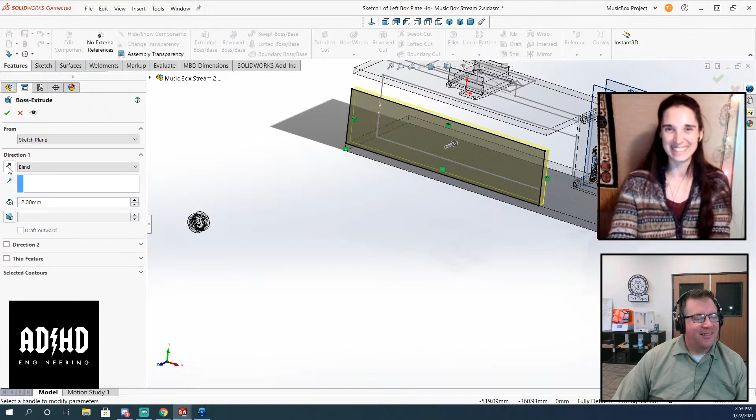Glue. Hot glue? No, probably what's he always using? Washers, Loctite, Loctite it. Is there a Loctite product for wood, and can we use it? Yeah, it's known as- I'm looking it up. So Loctite makes a bunch of adhesives, and there probably is one known as wood glue. Can we just cast the whole thing out of Loctite, like make a form?

Ooh, I like your washers thinking. Just washers embedded in a transparent Loctite resin. Oh, what is that? What's the English name for that? Hold on, I love the orb. Loctite wood adhesive.

PL. Okay, so what if we made like a Loctite washer aspic? Yeah, aspic. I have no idea what that is. Resin? Or are you talking actual Jello? That might help dampen some vibrations. Not Jello, gelatin. Aspic is gelatin. Yeah, no, we'd use Loctite instead. Oh, aspic, that's the stuff my mom used to make, and I hated it.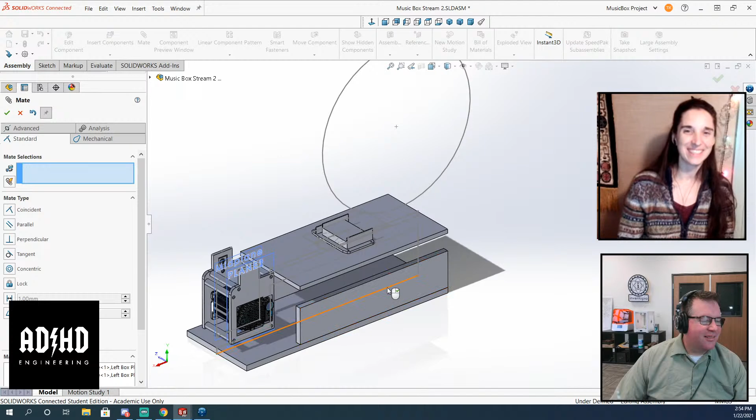Aspic is just a savory Jello dish, made with gelatin. You ever had fermented herring in Jello? That sounds good. Oh God, no. I'm gonna need you to send me some, Eric. I really want to try it. Yeah, most postal services or shipping agents, they won't ship fermented herring.

From the pressure. As long as you put it into a suitable pressure vessel, I think it should be safe. No, not even double bagging it is gonna save you. I'm talking about those things compressed air is shipped in, you got to put it into giant metal- Oh, just put it in one of those cases we were talking about last time.

What are those cases called? Pelican case. Yeah, just have it in its own little foam thing and wrap the foam in a plastic bag so nothing can get out. That makes tons of sense. I mean, pelicans eat fish already, so they're ready. It actually ferments in their lower jaw, so it's perfect.

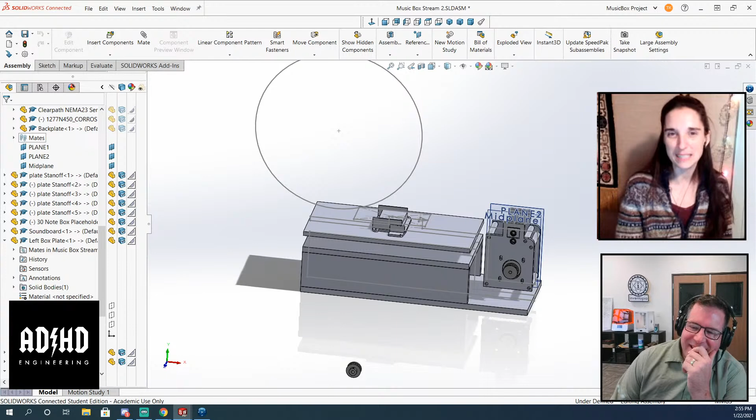Have you ever smelled a pelican, seriously? No, have you? I have never smelled a pelican. You should try it sometime. But we don't have pelicans here, just at the zoo. Oh, that's sad, we have seagulls. Forget smells like Teen Spirit, Maureen grew up with smells like pelican. It smells like pelican jaw. Oh dear, all right.

So that said, okay, we have 4 minutes. So we are at a place where we have completely redone this assembly, right? Because we had a dependency in the sketch. Let's see, is my layout sketch still up at the top?

Jorn said there's red in the design tree. Uh-oh, there is, there is. I can fix it though. I think I fixed it. Well, unfortunately your logo is covering half the design tree, so I can't really see under it. Yeah, it's great, I can't see any problems. It's perfect, ship it. There you go.

So there was an issue, because I changed one of the sketches when I rebuilt this part here. I subtracted the 12 millimeters for the top plate. So I figured this plate should be on top of this, and this one should be on top of that. That way we could have fasteners coming from here into this, with no visible fasteners, and then on the side.

We need to see a plywood edge on there, matching the MMX. Yeah, we'll have plywood edges for sure there.

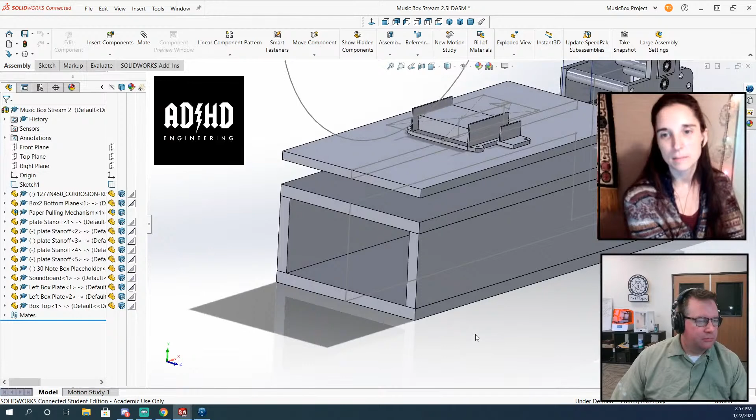So in this assembly, Tim, your first component is whatever that number is, the corrosion resistance one. You see the F next to the graduation cap in its title? Fixed. Yeah, so that means that it's grounded in Fusion terms.

And the ones that are with a dash are not grounded at all, so you could actually drag them around, but they're not mated. They can also be deleted. I'm concerned about the ones that don't have either one - I don't think I've ever seen that before in an assembly where parts aren't either floating or fixed. Well, they're fully constrained, right?

So I spoke too soon. Yoren says the dash is underdefined. No, and he's right, it is underdefined. It's the ones that have no symbol whatsoever that are fully defined, which is good. What do you mean by fully?

In terms of this dash right here, these are underdefined in terms of the rotational mates, so it doesn't really matter if that's defined or not. No, I get it - I'm used to only seeing either fixed or floating: fixed if it has an F, floating if it has a dash. I've never seen them without either one.

Well, if it's fully constrained, it's like that, right? So wait, how would you constrain that circle? Because you clicked on the circle to mate it, and that makes it rotate. But how would you do it if you didn't want it to rotate? You'd probably just fix it, unless you could give it some sort of angular thing. I don't have a feature on this that I could use to give it that.

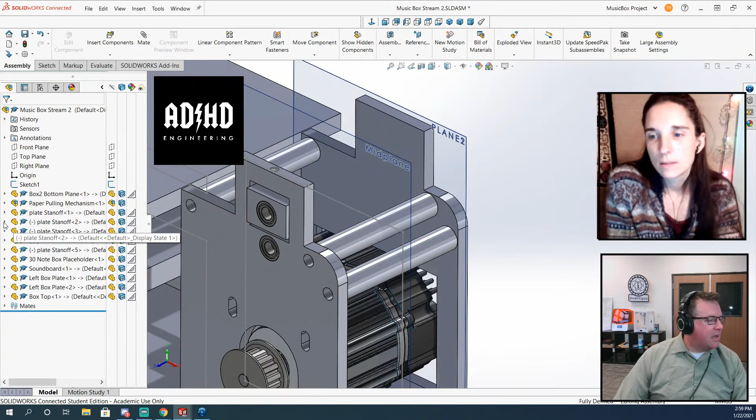Well, actually, what I would do is open up and use the planes of it. Oops, that's not the right part. Let's find this part - yeah, mate the planes.

So Yoren is saying F means fixed, which goes against most rules because it's basically a dirty way of not wanting to properly define something. Right, no, yeah, it's just like in a sketch - I try not to use fixed at all.

But if you have your first component it should be fixed, otherwise everything can move around. Right, yep. Well, and that's why that other one was fixed - I dragged that part in, but I deleted it because I was just doing that for a lark.

But yeah, I did that by grabbing the plane and making it parallel to an assembly plane. I realize now I just had a memory fart - Joran was right, that's what not having an F or a dash means. It's just defined by its mates.

But it's interesting - he also said you can lock the rotation by right-clicking on the concentric mate. Yeah, you can do that. That's true. He said first component: mate the origin to the origin of the assembly.

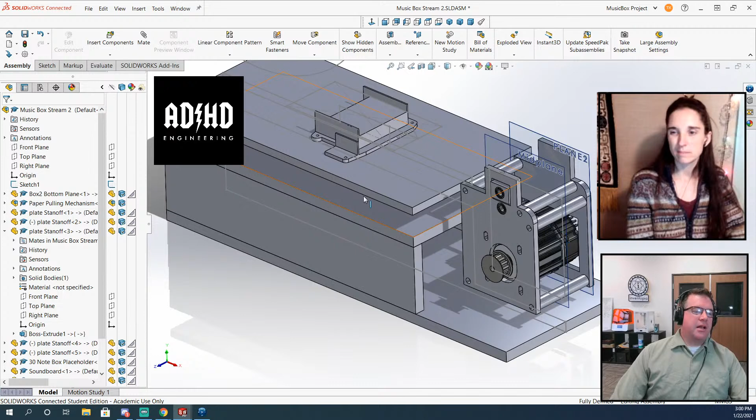You guys know what the pirate's favorite letter is, right? That one was too close to you saying R, dude. Oh well, it's not R. It's 'tis the sea.

Yes, thank you. Should we end there? Yeah, I think so.

When is Talk Like a Pirate Day? Does anyone know? I think it's September 19th, actually.

Why was the pirate movie not PG-13? Was it? Why? I stopped watching after the second one. It was R-rated.

All right, so let's talk about what's going to happen between now and when we're talking about this next week, because we're trying to keep other MMX team topics on topic with actually working on phase 1 of the MMX, right? So I am of a mind...

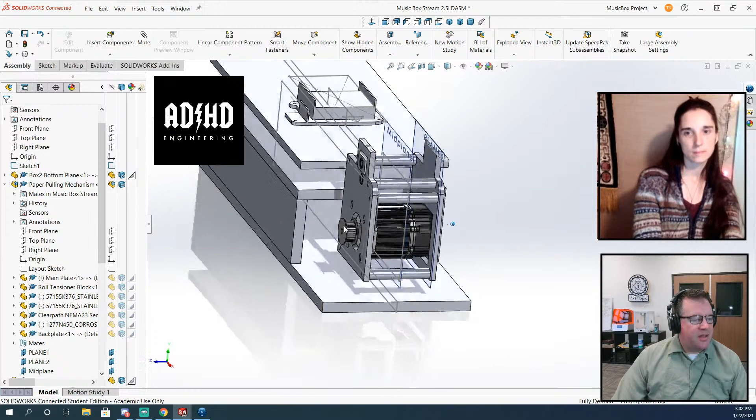These plates, I'm of a mind that this motor - I don't know, well I need his opinion. If we do this way, where this left plate is also the motor mount, right? It's guiding the paper and it's also the motor mount. Then this belt is going to be inside this wall, right? We're going to end up extending this wall over it and hiding it. And I think the belt needs to be external to the machine for maintenance purposes. Okay.

So I'm considering whether or not this upper part of this plate should be intrinsically coupled with the motor mount. It could be that the motor needs to couple itself in line with this plane as a separate part, still vibrationally isolated, and then we'd have a shaft that comes out of here and is longer. I don't know, thoughts there?

Well, so we're using a belt so that you can change the tension, right? Yeah, it's a gear reduction. And the other option, if you wanted to do a direct drive, the motor would be sticking out off the side, way out here. So it's a 2-to-1 gear reduction, and it gets it more compact.

And the original design also had, well, it was a chain. But putting a gear, like if we put a 2-to-1 gear reduction, that means this would have some nice pretty gears on the front, all plywood MMX style, and I like that. Because the belts seem like overkill to me a little bit.

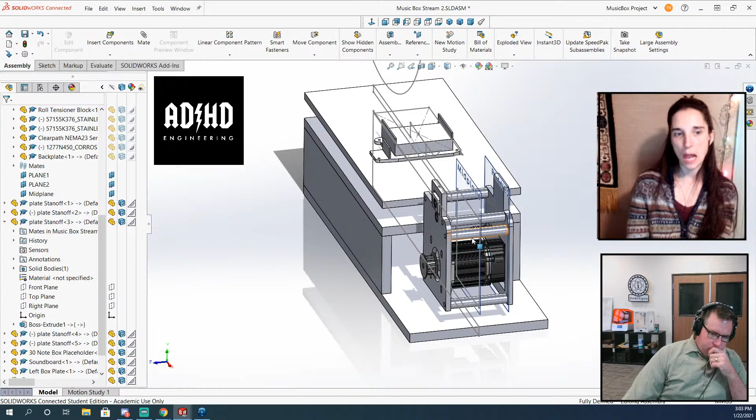Tim, you know what? I do have the paid version of Matthias Wandel's gear generator, as you know. If we want to say true MMX fashion, we don't use metric gears. We use those gears because that's what the MMX uses.

Yeah, I mean, that's... oh man, we have the full beauty of like SolidWorks, whatever, you could just do gear. No, actually we don't have that. We don't have that. Yeah, look, but you can do a function.

You could. So if the chain that was driving is external, I'm looking at this screenshot, and that's on the front of the box, and you can see it, and it's really ugly. Actually, let me download that. That's all original Marble Machine ugliness. We need some wooden gears on there.

Well, I mean, I very much do appreciate the point, and I'm very tempted by that. The gears are going to be sloppier than the belt, right? And I was okay with that because the MMX has a belt, has several belts, right? So I was okay with the belt for that, and I like that better than the chain. But I have to admit the temptation to use wooden gears for aesthetic purposes is really, really big. That just seems like the right call from an aesthetic perspective.

I think one thing I want to emphasize in this design is that what we're doing here is what the MMX could be. We're not just trying to copy the MMX, we're trying to make a better version, right? Because this is like practice for phase 2. So if we're looking at something and we're like, oh, the MMX has this, so we should put it in - no, we should only put it in if it's really good, and if we're going to make an awesome version of that feature and put it on there.

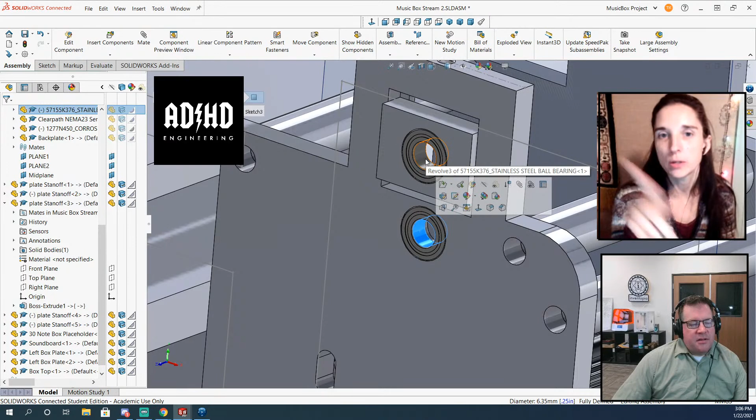Okay, but so you got rid of the design that had the arm off to the side? Yes, I did. Okay, sorry, that's what I'm reacting to. Yeah, I walked away from that because, I mean, that was in the thread on Discord midweek. This is just the simplest way to do it, I think.

But here's the question: if we could use gears, right? Part of me doesn't like the wooden gear thing because it's not that precise. And if we were to do gears, like we probably will be doing on the touring version of the MMX, how would we do those gears?

Well, like plywood, right? Plywood is soft, it's not durable over time. It's going to wear down. It can absorb moisture and possibly swell, and just over time become unplied. There's a million issues.

I mean, there's an argument for saying, on the touring version of the MMX, we could make segments. You couldn't make it out of one sheet, but you could make segments and put them together, of Delrin gear teeth for the MMX. Let's use magnet gears. I think those are so cool.

I'm just going to ignore the fact that you said that, Maureen. Yeah, I know, but anyway, so we could play with that. A Delrin gear that is going to be a little bit more durable is something we can machine ourselves. That's an option. I do like the idea of gears.

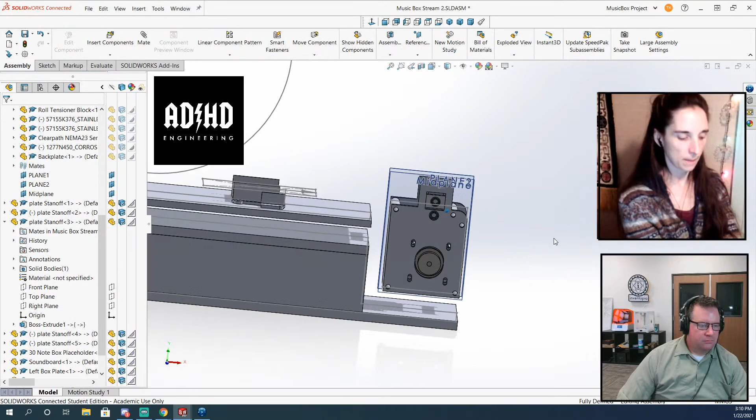What I wanted to say about the wooden teeth is that Martin was doing a lot of experimenting when he started out, and from looking at the photo reference, the gear teeth are a lot of different shapes. If we used the gear generator from Matthias Wandel, we could probably find something tighter than the MMX. It's not going to really solve the wear issues or the other issues with plywood, but there might not be so much slop. The geometry I'm okay with. I do care about the wear, and what I care most about is slop.

So here's a question, take a look at this modern piece of software. Are you doing the gear generator? Yes, the gear generator - I paid for this. These are just cosmetic gears, FYI, they're not like real gears, they're not actually involutes.

So here's a question: are more teeth less sloppy? It's more smaller teeth. In general, the 3D printer extruder gears had very fine teeth on both sides, and they meshed. If we scale down the programming wheel to be sized to the music box, would that work? I don't know. Well, oh no, these are imperial gears, that's the other part.

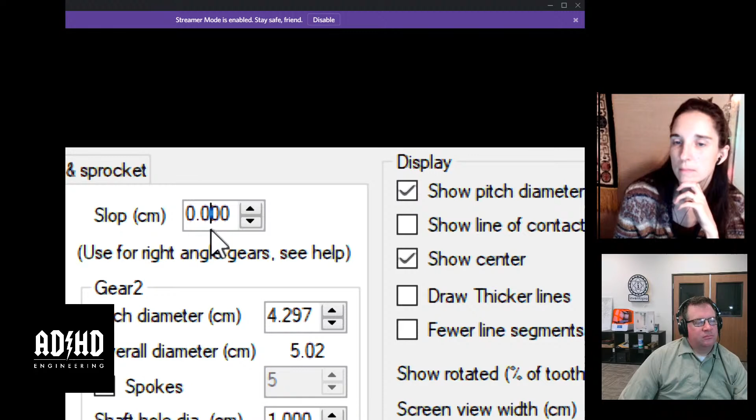Diametral pitch - if you only knew the conversation I had with Matthias Wandel, oh my god! I asked him why he didn't have a module, and it was, he didn't know what it was. Yeah, he didn't even know what a module was. It was pretty interesting, to say the least, to have this conversation. He actually went from being a complete stranger on the internet to a mortal enemy of mine within about 5 minutes. It was the weirdest thing - those things don't have to be different, right? I still think it's funny that you just called him, like, hey, what's going on? Yeah, that's sweet.

Okay, so I have a possible suggestion. If you make a plastic gear, it can have zero slop because you just smash the gear teeth in there, and you won't hear the noise of it hitting because it's plastic. That's the whole point of using Delrin. We could do that, and then put a plywood veneer on the side of it. That just makes my heart hurt.

Also, now I'm realizing, are we making this to match the MMXT, not the studio one? Or are we making a studio one and then upgrading that? Like, are we making it a studio one for a present? So the MMX can have a baby... that Marble Machine had a child. I think that's the right way to think about it. It's gonna be the MMXT version, and now we don't have to use the same gears or design aesthetic because we don't have any idea.

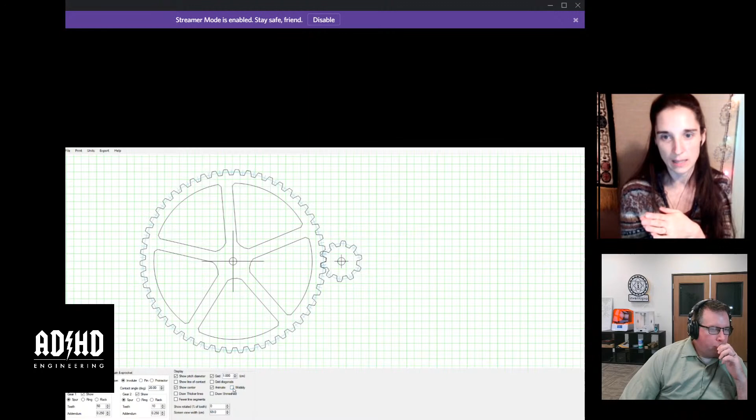I think, as an exercise for ourselves, it would be neat to try to take this music box and make it look like the Studio MMX, just as an exercise, whether or not it ever gets made. I think it would be fun to restrict ourselves to those parameters and see what we come up with. That's just me, though.

What the heck? Why would you make it wobbly? I don't know, I just have that option. Okay, I paid $26 for this.

We gotta end this meeting. That's great, so let's end the meeting.

So here's my list of tasks for the team members this week to help with, if anybody wants to and has time and is excited. The first one is help develop specs for, or just go ahead and find, a brushless motor that's smaller, needs all the stuff we already talked about.

We need someone to dimension stuff for us, dimensions of the plywood box. Might as well dimension the whole thing, like the big wheel, just so we have those to start with.

And then the third thing is, well, you just had the question: if the left plate is the motor mount, the belt would be inside the wall. Should it be external? Do you want like a pole? Should the belt be external, or were you just talking about that in the moment?

If people want to come up with ideas for how these components get oriented, because right now, the way I just extended these walls, this whole ugly mechanical setup isn't that dissimilar from how the original Marble Machine, the original music box, had this Lego module that kind of flipped onto it. Here I have this aluminum module that has these standoffs, and it can just sit into the machine. We can put it in there, fasten it, and it works.

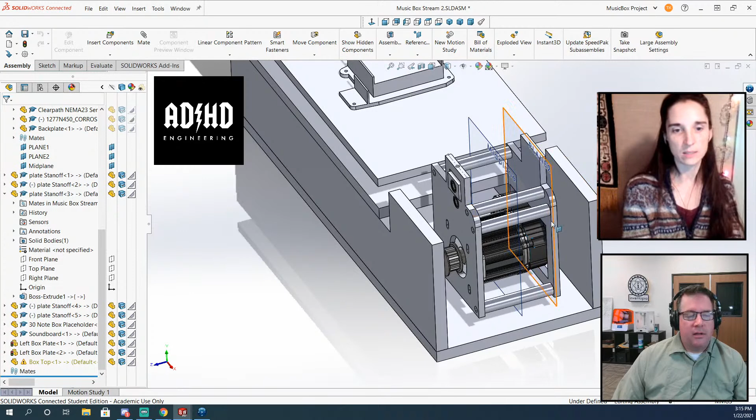Anyway, let's see. Okay, so thoughts on belt versus gears, and how internal or external the belt should be, and how this module gets mounted. I'm actually kind of liking what's happening here at the moment.

Okay, yeah, so that's good for this week for giving some challenges to the team. Okay, love it, cool. Ship it. All right, ship the task assignments for the week.